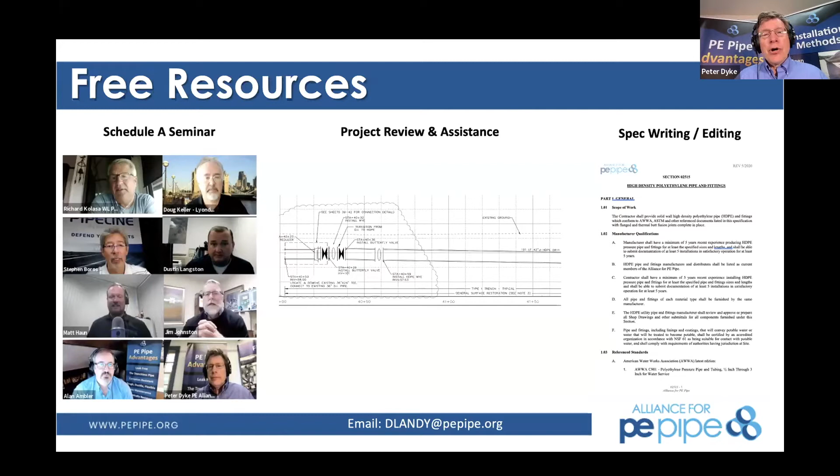So we are revising and adding material to the engineers package that was released in May of 2020. We have learned a lot from you about what you want to see in the engineers package and how it assists you. You've shared specifications with us, project details and plans, and that library continues to grow and grow. So for this one, we've added a specification on slip lining, compressive fit slip lining, and some other additional typical details. We're also really pushing up quite a bit on testing — getting our hands dirty and deep into testing. And of course, in normal fashion, we'll make it very light and in layman's terms too, if you're not interested in going that heavy and deep. We anticipate rolling it out at the end of this year, Pete, if we have any luck. Thank you very much for asking.

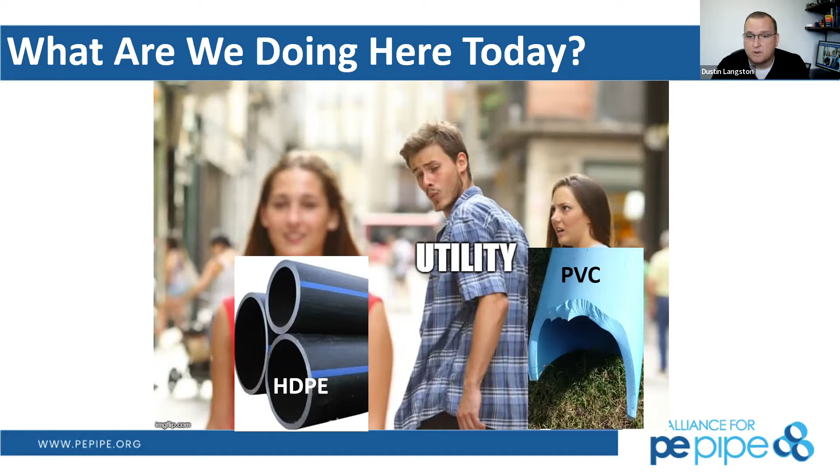Peter talked about this a little bit, the natural evolution of metallic and even before metallic, wood stave and clay pipes, to the plastic generation, PVC and polyethylene. For their time, cast iron pipes were fantastic. Even wood stave, there's a lot of people who don't know this, there's still a lot of wood stave pipe in the ground today.

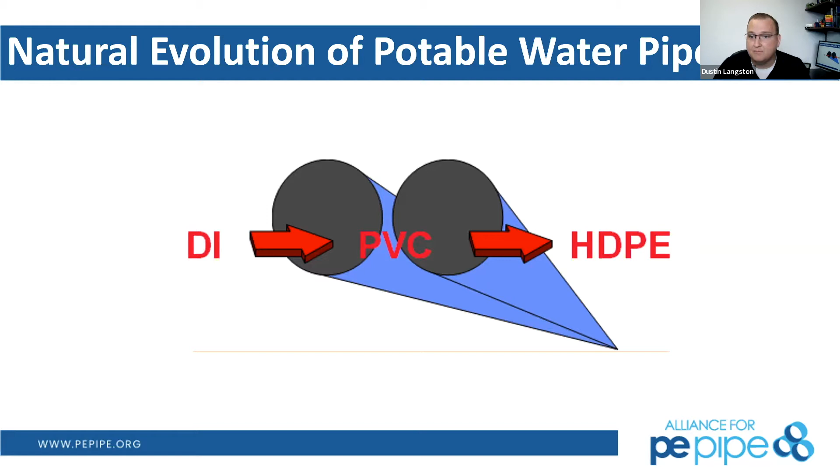Cast iron is the exact same thing, and that's what the ductile iron industry talks about with their 100-year centennial club, they're talking about cast iron pipes that have been in the ground for a very long time, and they're very thick walled. But like Peter talked about, there were some problems, and ductile iron fixed some of those, as did PVC fix some problems that ductile iron had. And at polyethylene, we feel we have the solution for today.

A little bit more of that history: we go to trade shows all over the country, give presentations all over the country, and it always makes me sad to hear people say 'oh, you're that new pipe I've been hearing about.' I'm just like, stab in the heart. Not new, we've been around for a long, long time. PVC was commercialized in 1965 with an AWWA standard. Polyethylene HDPE pipe was commercialized in 1967, just two years later.

And ductile iron, formal ductile iron, had their first AWWA standard in 1963. So we've all had an AWWA standard about the same amount of time. Where polyethylene pipe was a fusible product when it was first commercialized, we decided to chase after other welded products, which is steel pipe. So we started going after anything steel was used in: natural gas, oil and gas gathering, really mostly the energy markets.

PVC pipe came out about the same time. It solved a lot of the issues of metallic pipes and water systems, and they were a bell and spigot jointed pipe, so they chased the water market. In those times, we've become almost the predominant player in both of those markets. PVC by far makes up the majority of water and sewer pipes going in the ground today, as polyethylene makes up the great majority of lower pressure, lower than 300, 400 PSI, where steel used to be.

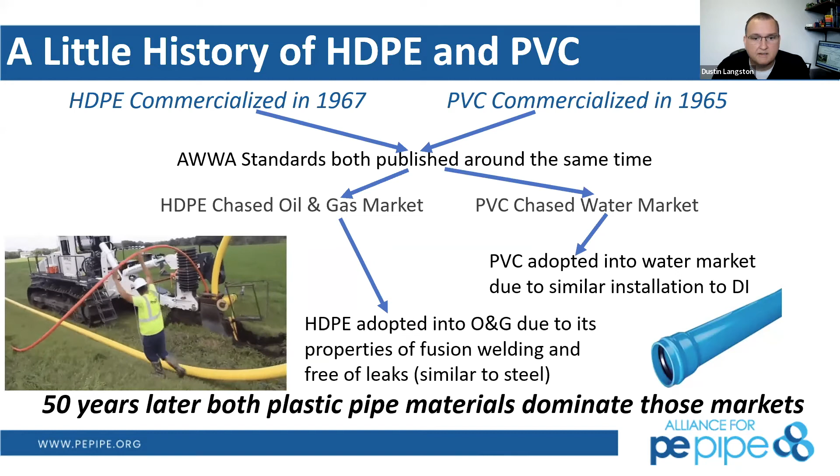In oil and gas gathering and in gas distribution, over the last 50 years, both polyethylene pipe and PVC have been very busy, and we've become the predominant players in those markets. HDPE pipe in the last really 10, 15 years has decided we really do have a fix for a lot of issues that the water and sewer industry markets see, and we need to be offering our product in those markets. So that's why you've considered us the new kid on the block up until now.

So a little bit more on the history. Peter touched on this a little bit. Cast iron pipes, again, very good, a very thick walled product, but they were susceptible to overloading, causing circumferential cracks, fracturing. And these were catastrophic. They would be big breaks. And that was just usually from overloading. If you overloaded that pipe type, put a building on it, under a road, things like that, overloaded, that would fail with a circular fracture.

Ductile iron came out and said, nope, we can fix this. We're going to come in, we're going to change the chemistry of this metal, and we're going to get away from these circular fractures. And it absolutely worked. They got rid of that completely. But our new susceptible failure type now is corrosion.

Asbestos cement pipe, during World War II, we really didn't have a lot of metals to use, so we had to get creative. Asbestos cement pipe came out, and it's now at the end of its life, and it's failing in that same style, which is mostly circular fractures and then joint failures now.

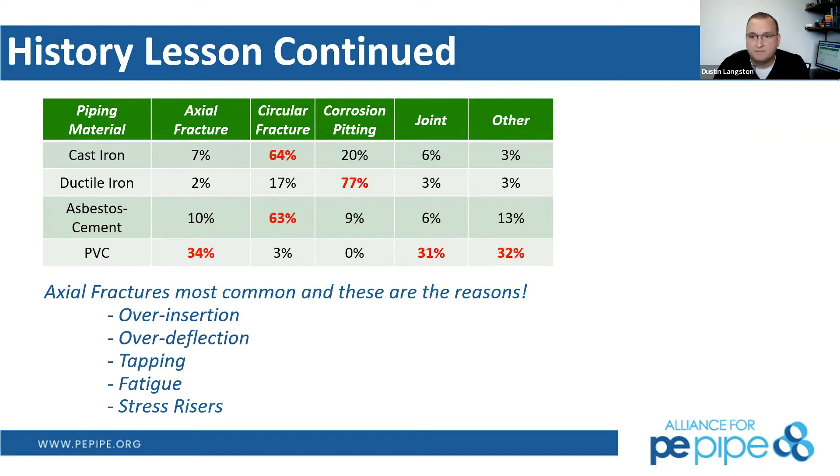PVC, this is a completely different type of failure that we're starting to see with PVC pipe that's never really been seen in the water market before. We'll talk a little bit more about this at the end of the presentation. We don't really have the circular fractures. Obviously, there's no corrosion. Same with polyethylene, no corrosion. But axial fractures have become the new failure type that we really need to talk about, and a lot of these failures are from poor installation. Flat out, PVC can have a very long service life if it's designed and especially installed correctly.

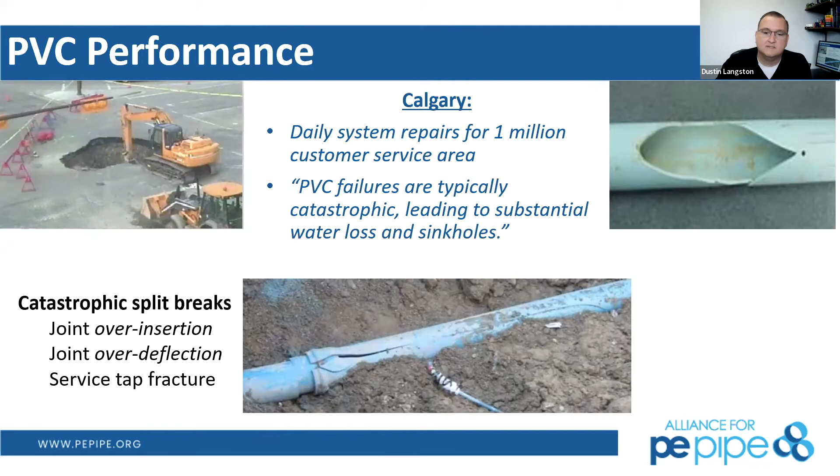The city of Calgary actually did a study here, about 5-6 years ago, on their PVC system and their ductile iron system, to see why it was breaking, what the costs were associated with those breaks, and how long service lives usually were on these products. City of Calgary, for those that don't know, in Alberta, Canada, has over 1 million services in that city. And the findings of their report was ductile iron was by far failing more than anything else.

Pinhole leaks, tuberculation, corrosion, averaging 15.9 breaks, so 16 breaks per 100 miles. PVC was breaking much less frequently, about 1.2 breaks per 100 miles. They also did have polyethylene in this data. We don't like to show it just because they didn't have a lot of polyethylene, but of course the break rate was much less with polyethylene. That kind of skews things because we really didn't have a lot of miles in the city of Calgary. But PVC had much fewer failures than the ductile iron systems.

But in that time, they started to realize that even though we're having 7.5% the break rate of ductile iron, PVC, when it did fail, was failing catastrophically in these axial long running cracks that would destroy whatever infrastructure was above it. So even though it was 7.5% the break rate, it was 764% the break cost. To excavate down to a ductile iron pipe and put a band clamp over a corroded area is very inexpensive and did very little damage above it. When a PVC pipeline came open, unzipped, if you will, it created a big pothole, a lot of damage. It was very expensive.

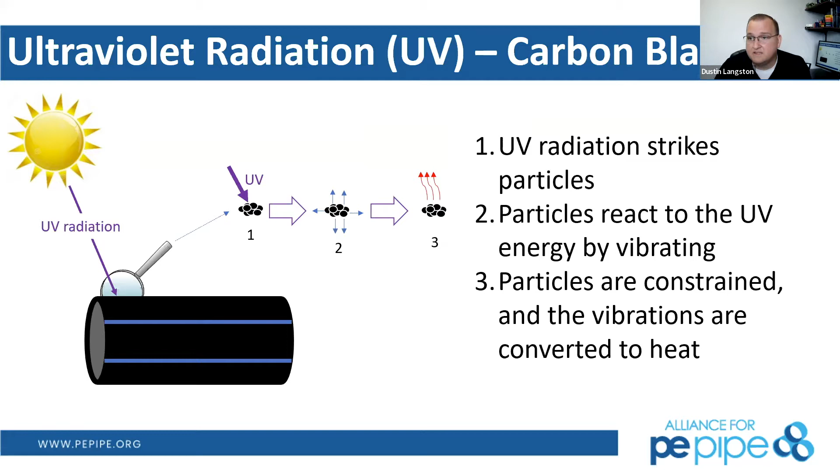So moving on, ultraviolet radiation. A lot of plastics are susceptible to UV degradation. If you ever leave a clear soda bottle out in the sun, you'll see it browns and yellows and starts to degrade. With polyethylene pipe, we use a carbon black additive so that you can actually store it above ground and install it indefinitely above ground. It is completely UV stable for the service life of that pipe.

It's called dehydrochlorination. So Dusty, with polyethylene though, the gray pipe, which is polyethylene, it's just like PVC, you can't leave it out in the sun, right? No, that's a good point.

So you can get polyethylene in different colors, blue and gray, for example. We are still UV stable up to 2 or 3 years. I've asked the PVC guy several times what their recommendation is, and they really don't recommend any outdoor storage - if it's going to be outdoors, please cover the bundles of pipe. So polyethylene, if you get gray for sewer pipe or blue for potable water, these are just options. Most of the time it comes in black with whatever color stripe you want. It's 2 to 3 year UV resistance for those colored polyethylene pipes.

Okay, so that's the gray, but standard black is indefinite outdoors, is that correct? Yeah, we have lots of applications where it's been installed 50 plus years above ground in mines, all kinds of applications. Thank you.

As we spoke more in the last webinar, one of the reasons to do a white interior or gray pipe is it reflects the CCTV camera light better in gravity sewer inspection. So the industry had seen that as a need and subsequently invented Camcore and other products to be able to do so.

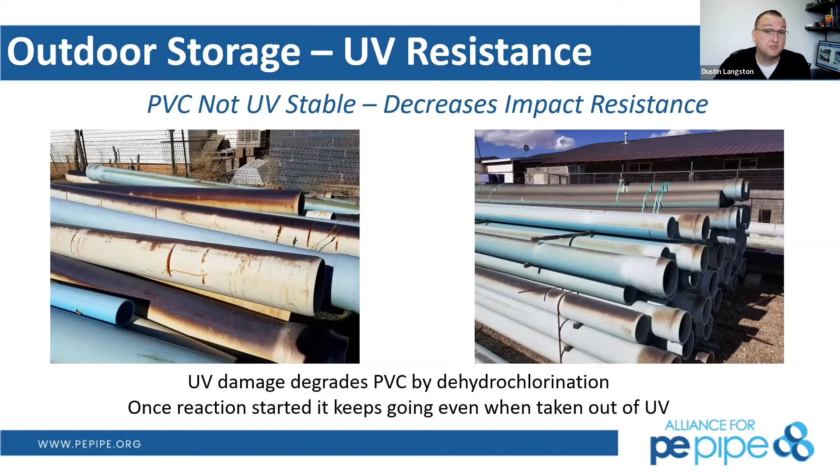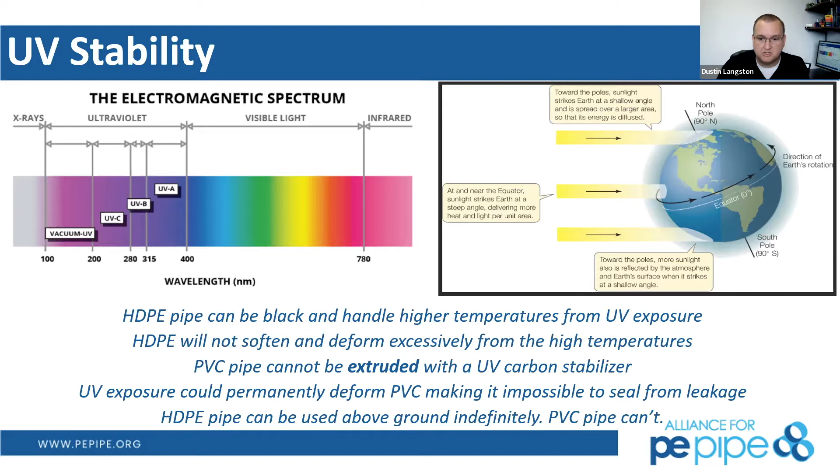Back to dehydrochlorination, this process, once it begins from UV damage, it actually keeps going in PVC, and it can decrease impact strength or impact resistance. So with PVC, well, why doesn't PVC just put black in their pipe like polyethylene does? They might be able to get away with that if they weren't storing it outside. But with PVC, if you were to put black in it, the pipe temperature gets very high. HDPE pipe can handle those higher pipe temperatures from that high UV radiation, but for PVC pipe, it just can't handle the high temperatures that come with being a black pipe.

So bend radius - HDPE pipe is by far the most flexible water pipe type out there. Anybody who's used polyethylene pipe for service tubing knows this. It's absolutely one of the biggest benefits of using polyethylene pipe. One of our claims to fame is you can take an 8-inch DIPS polyethylene pipe, wrap it around a standard 40-foot cul-de-sac with zero fittings. It's flexible enough to do that, and you can still make all your service connections off of that bend arc.

PVC, for example, it's 250 times the diameter, and for polyethylene pipe it's 25 times. All the deflection takes place inside of that bell and spigot joint - it is not allowing you to bend the barrel of the pipe. Same goes for cast and ductile iron.

They have the exact same bend radius because the bend, again, is taking place within that bell and spigot joint.

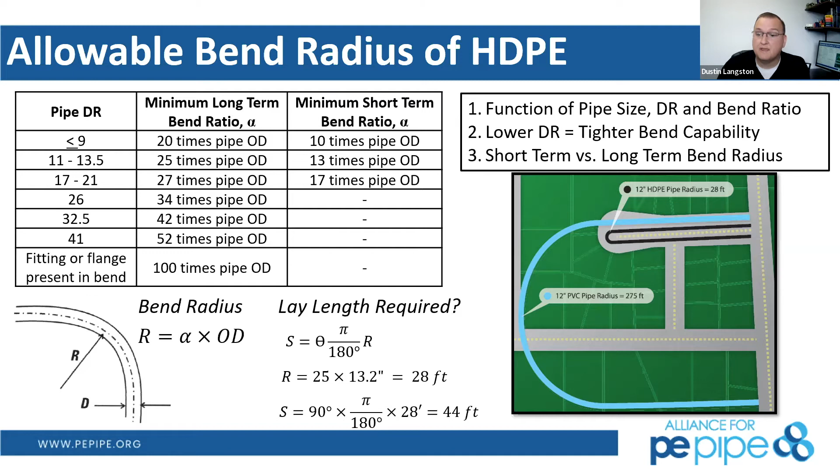Back to that bell and spigot joint, deflection takes place again inside of that bell and spigot joint for PVC and ductile iron. PVC allows 3 degrees of deflection in smaller diameters, only 1 degree of deflection in larger diameter PVC, but failure can occur at as little as 5 degrees. So it's a pretty tight window of what's allowable versus what can cause an actual bell failure in the future.

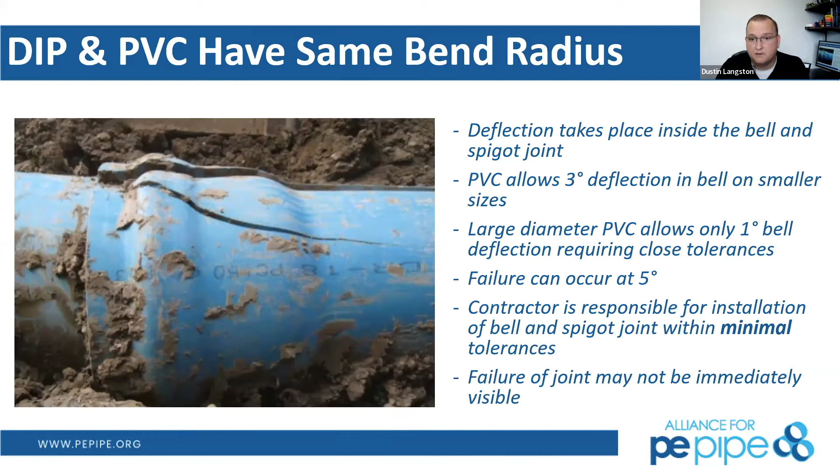Again, these are installation issues, but this is what the city of Calgary was seeing. So during PVC installation, care is of utmost importance. It's especially important to restrain those joints, usually by burying the pipe as you go.

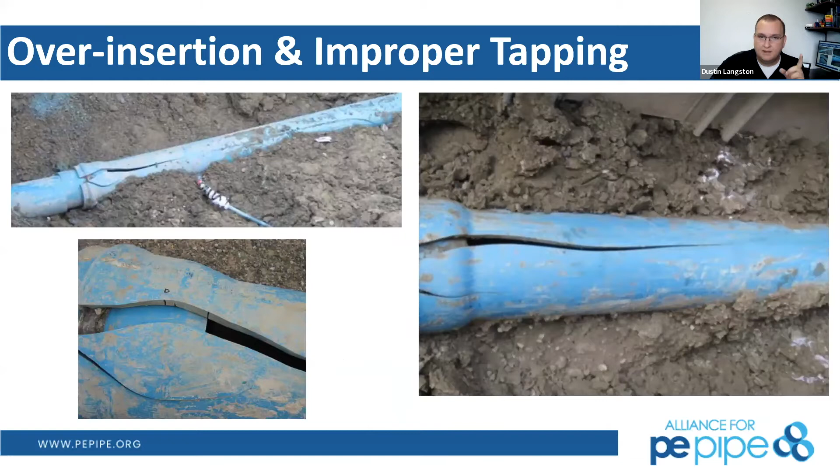If you don't do this, you can actually get a forward over-insertion of where you had already been. You already stabbed it to the correct depth, and now you go down the line to stab the next joint. If it's not restrained ahead of time, you're going to over-insert down the line, and that's what this actually looks like right here. Ford Meter Box has invented a fitting to bolt around the pipe to prevent over-insertion.

But if you're not burying it or restraining it some way as you go, PVC can be susceptible to over-insertion down the line. You're trying to stab that new stick in, and all of a sudden things get hung up, you're at too much of an angle, whatever the case, and it might find an easier way down the line to move that pipe. So it's very important to make sure there's no over-insertion.

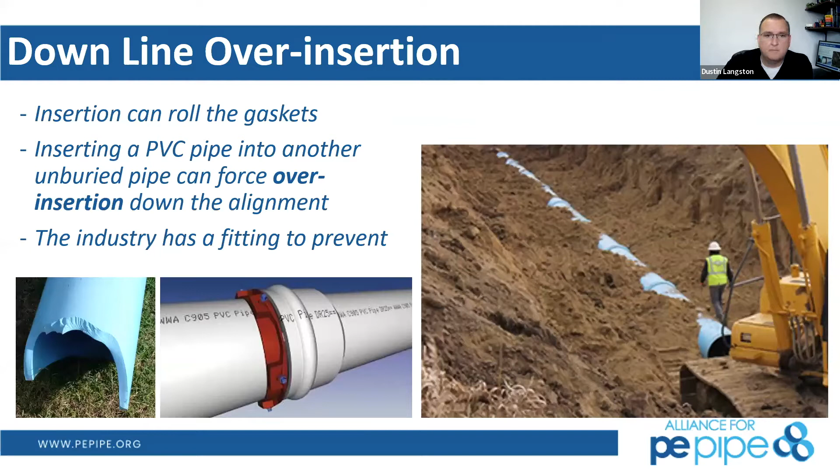Flint actually had some issues like this with a 2-mile, 16-inch line, 14 failures due to over-insertion. Peter, are you coming on to talk a little bit more about Flint for me?

Yeah, it was kind of funny, going back to that previous slide, Dustin, we were there in Flint because they asked us to come teach them about polyethylene. I tried for years to get in there, and they have a ductile iron plant in town, and they wanted to use ductile and bell and spigot systems. Then while we were doing this presentation, over against the wall was this piece of 16-inch cracked PVC, Dusty. And I'm like, wow. So I heard the story, and that's how it got there.

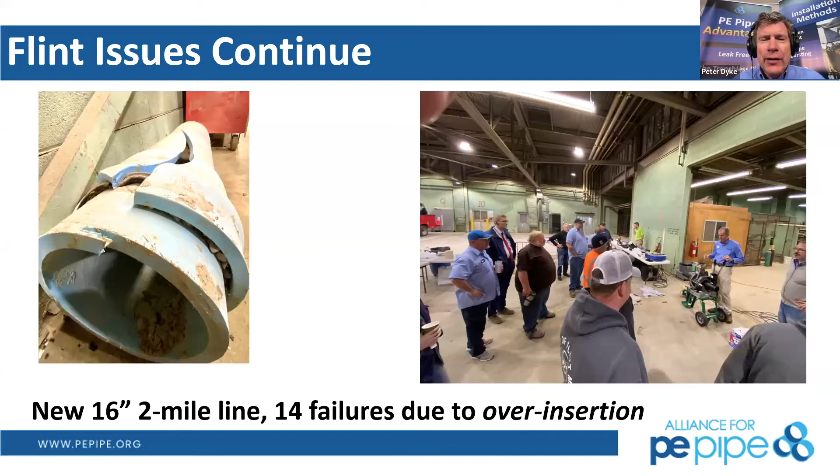But it's easy, everybody knows about the issues that Flint had. I think if you look at Flint and all the issues they're having, they're a microcosm for the balance of the United States.

Whether it's wood coming out of the ground—there's still wood in operation, although not a lot of it, they pulled some of that out in the last couple of years—sinkholes in the downtown. A sinkhole used to be a limestone cavity in rock formations; now it's cars and vehicles falling in from infrastructure failure caused by high pressure water. Cast iron and ductile iron failures, people taking pictures with huge water main failures, Dusty.

What's going on in Flint is going on everywhere. Maybe not all of it at the same time, but when you have a utility that's essentially bankrupt, a lot of bad things happen simultaneously. Flint is on their way out. I'm excited to be part of this process of education and how polyethylene can help solve the problems, but everybody needs to look at this, particularly places like Houston and the big cities that are having huge water loss numbers and large water main breaks on an annual basis.

So Dusty, I turn it back to you. I make it kind of sound like we're picking on Flint—we're not really, because it is a microcosm. No, you're absolutely right. Flint is the perfect example of so many cities and municipalities across the country, especially in the Eastern US.

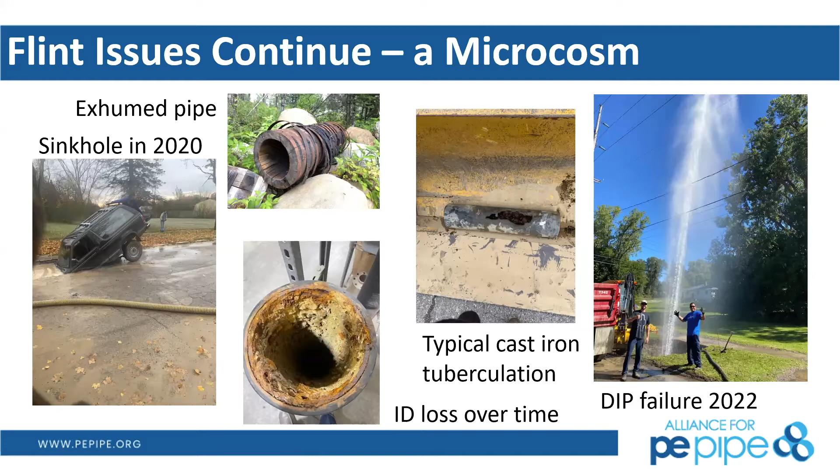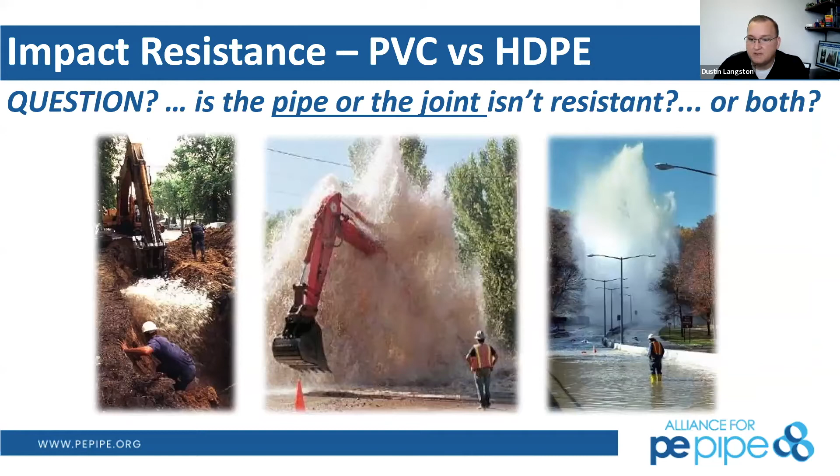Moving on now to impact resistance. Again, this is compounded with UV degradation. Hopefully you're getting your pipe in the ground without it being stored above ground for 6 months or a year, so you don't really have the UV degradation. But PVC versus HDPE pipe, HDPE is incredibly impact resistant. Let's go over that real quick with a little video.

This is a video we put together at McElroy Manufacturing. This is what we call the bucket drop test, where we filled an excavator bucket full of cement. We cut 3 different pipe materials, 4-inch diameter each, 7 inches long, and the bucket weighed 170 pounds.

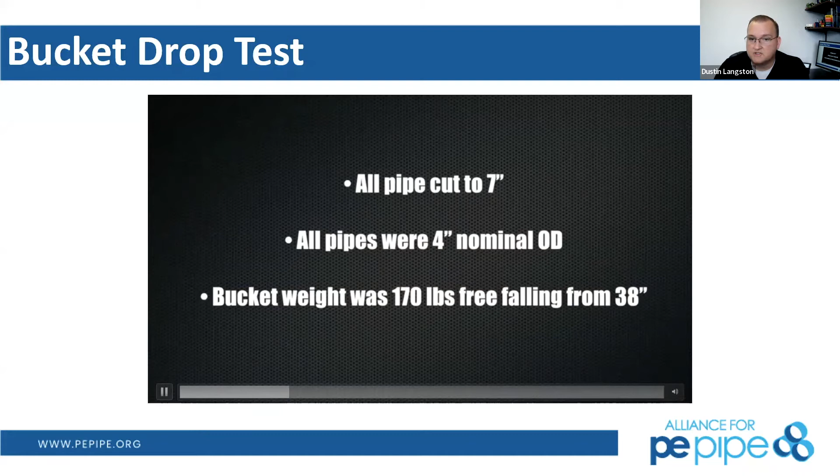First up, we have cast iron. Anybody who's worked with cast iron in sewer is very familiar with how brittle it is.

Here we had DR14 PVC.

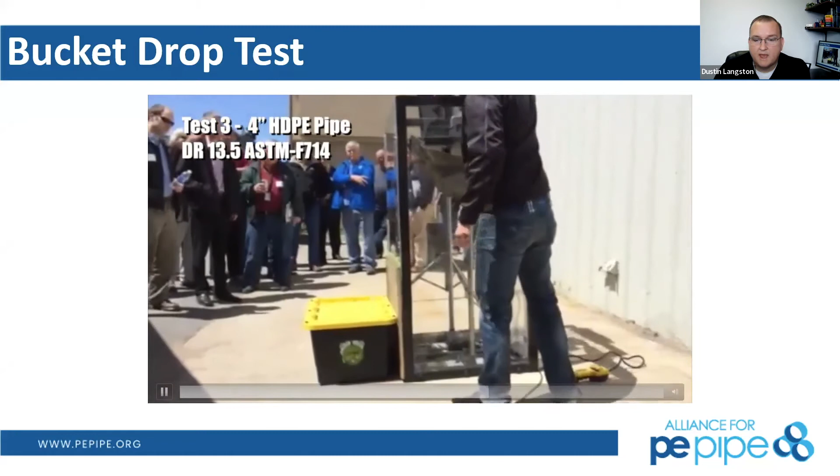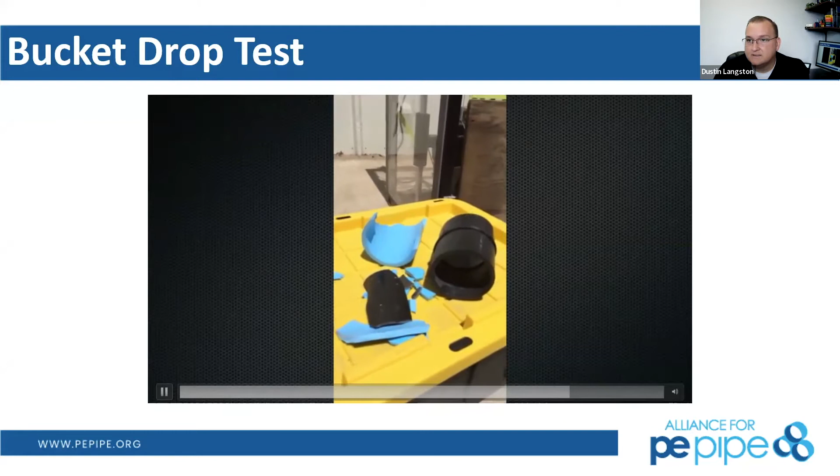And here we have polyethylene, HDPE pipe, with a fusion in the very middle of the pipe. You can see the difference there. The bucket actually struck it twice because it's so flexible, it bounced. Again, that was with a fusion joint in between.

I would love to update this and throw some ductile iron in there. While the ductile iron would not shatter like cast iron, the internal cement liner would absolutely crack and slough off, and you'd have a permanent deformation from that ductile iron hit. So that's a great slide to show the impact resistance of polyethylene pipe. And now it's just going to play this video forever.

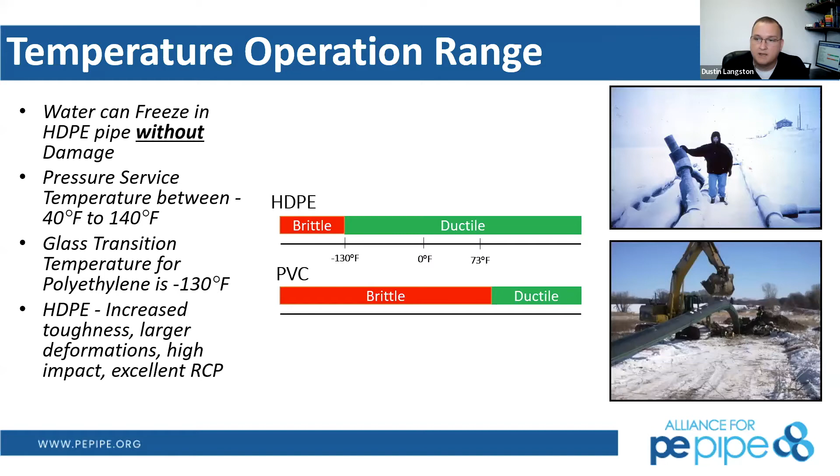One other great benefit of HDPE pipe is temperature extremes. HDPE pipe, even at very cold temperatures down to negative 130 degrees Fahrenheit, still acts as a ductile pipe material. Where PVC, even up to 73 degrees, acts as a brittle material still in its glassy state. Polyethylene pipe can also be used at much higher temperatures than PVC, so it's a better all-around material for temperature extremes outside of the water market. Water and sewer is pretty consistent with temperatures, but for anything high and low, polyethylene pipe is going to be a great fit.

One big thing our competition loves to throw us under the bus for is hydrocarbon permeation. I'll say all pipe types are susceptible to this because gaskets in bell and spigot joints for all pipe materials are susceptible. There's a Water Research Foundation report, probably 7-8 years ago now, where they wanted to see who's being affected by hydrocarbon permeation. The study actually found no instances with polyethylene pipe, but found plenty, especially under houses and personal driveways, of hydrocarbon permeation through gasketed joints.

One of the things we do as competent, responsible environmental engineers, when we can, is if we know there are hydrocarbons within that area, or brownfields as they're called, we don't install pipelines there. We try to route around it, or clean up the hydrocarbons that are there. So that makes logical sense.

But if you're not afforded that opportunity, high density polyethylene offers dual containment, a pipe within a pipe. Those are used in landfill applications all over the place to get leachate, some really nasty stuff, out of landfills. HDPE is not unfamiliar with hydrocarbons, and we know how to handle it.

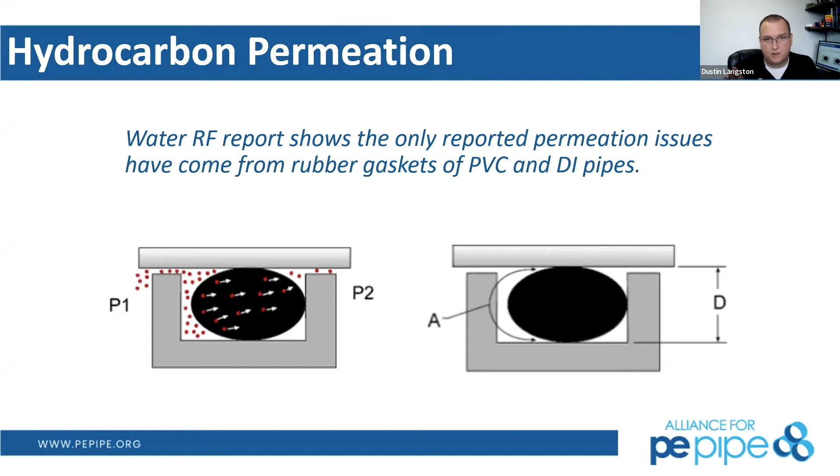On top of that, there's also a polyamide, a nylon wrap, just like ductile iron guys wrap ductile iron pipe to keep water off of it and corrosion away. If you're going through a hydrocarbon contaminated area, you can also wrap polyethylene pipe in a nylon wrap that is resistant to permeation. But again, if you can avoid it, just avoid the brownfields and try to go around.

Gaskets have other issues with chloramines. Chlorine is rather aggressive towards rubber gaskets, but chloramine is by far the worst. We have a lot more cities across the country going to chloramines. Right now we're about 10 to 12, maybe 13% of the market as a disinfectant for chloramine, but it's getting better and more commonly accepted. So chloramines, while great for pipe materials, are very aggressive towards rubbers and gasket materials. In those areas making the changes, there are chloramine resistant gaskets, and they move that direction as well.

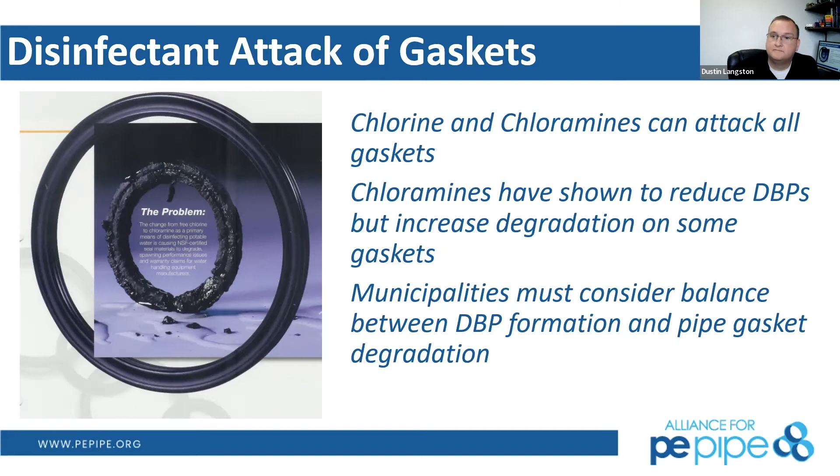One of the balancing acts that water operators and treatment plant operators have to go through is to look at disinfection byproducts that could result from disinfection bonding with organic materials. That's why chloramines came onto the scene. They're actually as old as traditional chlorine themselves or thereabouts, but there's definitely a balancing act of what happens in the pipe as we transmit fluid through it and what happens within your pipe network. You've got to watch it.

Continuing on with the gasket conversation, the EPA did a study back in 2015, so 7 years ago now, to find out how they were getting water contamination in bell and spigot jointed systems. They found that if you have a leak through a gasket, during normal situations you'd be exflowing, putting water out of that leak. But during a water hammer or fatigue cycle, you'd actually be pulling that now contaminated, or potentially contaminated, groundwater into the system through a low pressure spike on the other side of the water hammer event. They have a whole paper on it, here's the link, please copy, paste, and go read this study when you have time. It shows how potentially contaminated groundwater can come back into a bell and spigoted pipe system. So HDPE pipe, being completely thermally fused, is leak-free from point A to point B, so we don't have to worry about any of that potential.

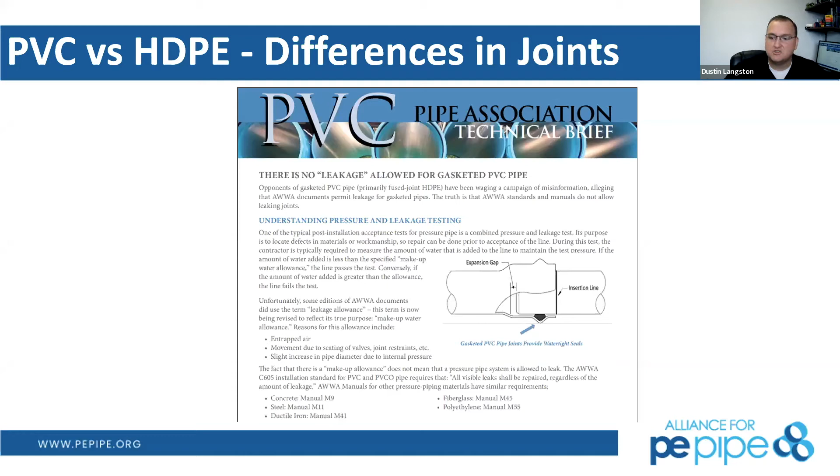What it really came down to is polyethylene pipe has the same thing. The pipe is going to move and figure out its final resting place, it's going to expand a little bit with pressurization. We've taken this into consideration. So when you pressure test a polyethylene pipe, you actually do an initial pressure up where you overpressure the pipe past its test pressure. This makes sure the pipe has fully expanded, moved, and gotten into its final resting place. Then you start your timer for your test, bring it down to your test pressure and start your timer. When you pressure test polyethylene pipe, you are allowed zero, and I mean zero, leakage, zero pressure drop. We're making sure that it's a leak-free system from point A to point B.

PVC guys and ductile iron guys could fix this exact same problem by establishing the same testing criteria, where they do an overpressurization, a time for relaxation so the pipe can become uniform, and then start their timer. But they will not do that, because we truly do believe there is going to be that bell and spigot leakage from day one.

Okay, so you're saying that it does leak during the testing? Yeah, and that the standard permits that? Correct. And even if it's perfectly installed and doesn't leak, that's great, but your standard still allows for a certain amount of gallons lost. So that's what we're trying to get them to change.

I have a question that Matt just responded to, which I really think you need to answer, Dusty. What about contraction and expansion due to temperature differences, which is the major reason not to use PE pipe, especially over long distances? Love it, love it.

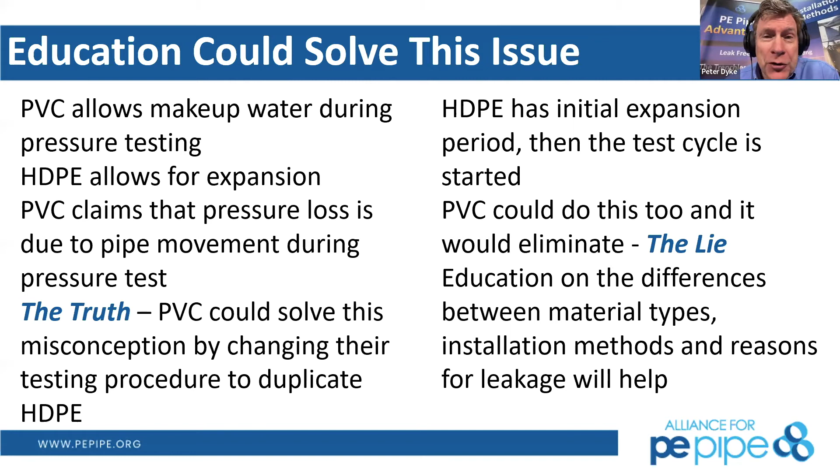So just to go back up a little bit, let's talk a bit more about PVC's history, so we can talk about some of the potential issues that we, as engineers, really need to be designing to get away from and stay away from.

So in 1986, the PVC industry changed AWWA C905. They increased the pressure ratings and lowered safety factors, with no change in materials. It was just, hey, C905 is large sizes, predominantly transmission, and in transmission pipes we don't really see a lot of cyclic fatigue, so we're going to allow higher pressure ratings going forward. It went through and got approved, and overnight a DR18 went from a pressure class of 150 to a pressure class of 235.

Then in 2007, the PVC industry went back to AWWA to change C900, their smaller diameter distribution standard at the time. They said, we've had great success with C905, we haven't seen a lot of failures—but they didn't take into consideration that distribution systems see a lot of cycles and a lot of water hammer events. They said, well, we didn't have failures in C905, so let's make C900 consistent across the board. Again, no change in materials, no cell class improvements, just overnight, with a stroke of a pen, higher pressure classes in C900.

And then the final change in 2018, they took C900 and made that the one standard. There's no longer a C905. It's now distribution and transmission all in one standard. This will probably happen for polyethylene pipe in the future as well, where C901 and C906 become one standard.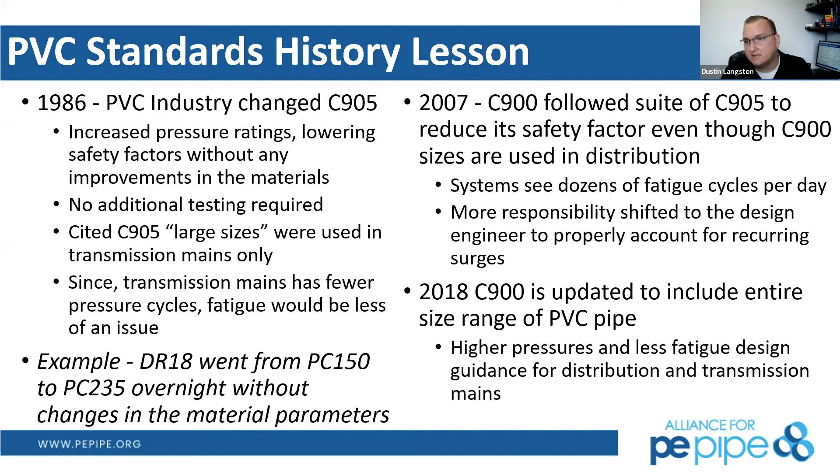HDPE pipe, we really don't see that issue. It's a monolithic pipe system, fully restrained, self-restrained fusion joints. One of the other system failures you find with PVC or ductile iron is if you don't thrust block them correctly, you'll have gasketed fittings push off at the end of the pipe, whether it's a tee or an elbow. HDPE pipe, again, is fully self-restrained. You weld it together and it's not going to come apart. There's no need for thrust blocking unless you're transitioning to another pipe material.

And we have ASTM standards for everything when it comes to HDPE pipe. Again, people think we're the new kid on the block. We're not. We have ASTM standards, AWWA standards for everything. Speaking of M55 at AWWA, the HDPE pipe manual for design is brand new. Make sure to go out there and get a new copy.

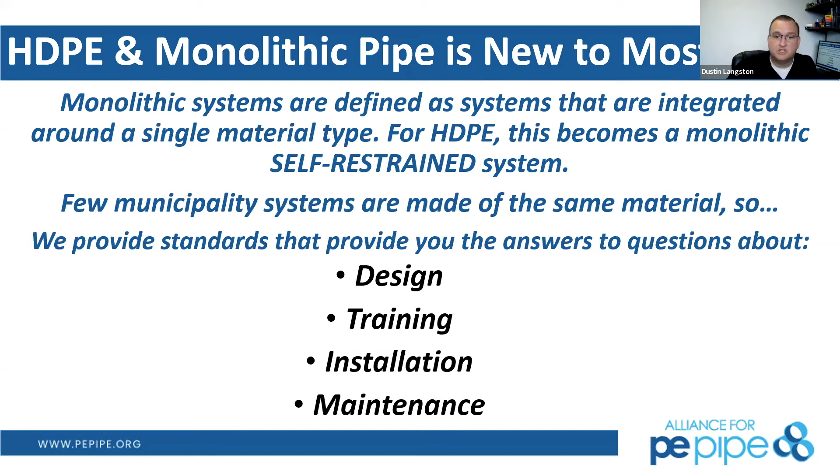Dusty, we've had a lot of great questions here on length growth during pulling for trenchless applications. So if you're pulling that pipe into place through horizontal directional drill, yes, you're going to put it under some tensile force and you may have some elongation. In the good old construction terminology, what we want to do is measure twice and cut once. So the contractor will fuse on a longer length of pipe to make sure that when he pulls it, it's not going to be short. Then they allow it to relax. Then you make that terminal connection itself.

So that's great, and there's two ways we're allowing this to relax. When we do a directional drill or a pipe burst, however long it took to pull into place, we want to make sure to allow it to rest that same amount of time for any strain left over in the pipe from that pull. But on top of that, we need to let that pipe temperature become the same as the ground. In the wintertime this isn't quite as important, but in the summertime, if we're doing a directional drill or pipe burst in July, and this pipe string has been sitting above ground, it could be 140 degrees where your ground temperature is 60 degrees.

So Alan hit it right on the head. When we do that pull, we're going to bring it through and keep a little bit long on both sides. Surprisingly, that relaxation period is typically in the 2-hour range, but we allow, as conservative belt-and-suspenders engineers, a 24-hour time period thereabouts.

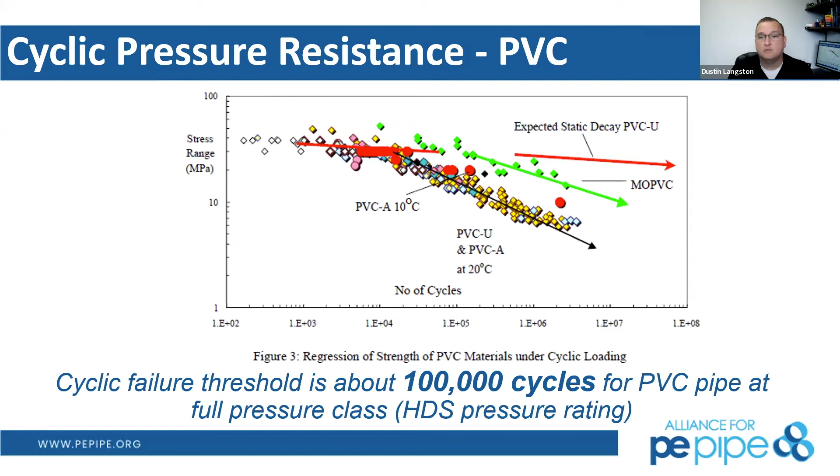So going back to cyclic fatigue. For PVC pipe, ultimately, when the pipe was installed perfectly, no over-insertion, no over-deflection, put in by the best contractor in the world, designed perfectly, the ultimate failure method of this pipe is going to be fatigue. It's going to be a cyclic fatigue failure. For PVC pipe, you can handle about 100,000 cycles. For HDPE pipe, we have testing now that shows we can have over 10 million cycles. Cyclic fatigue is not a design criteria for polyethylene pipe. It's just not a means of failure for us.

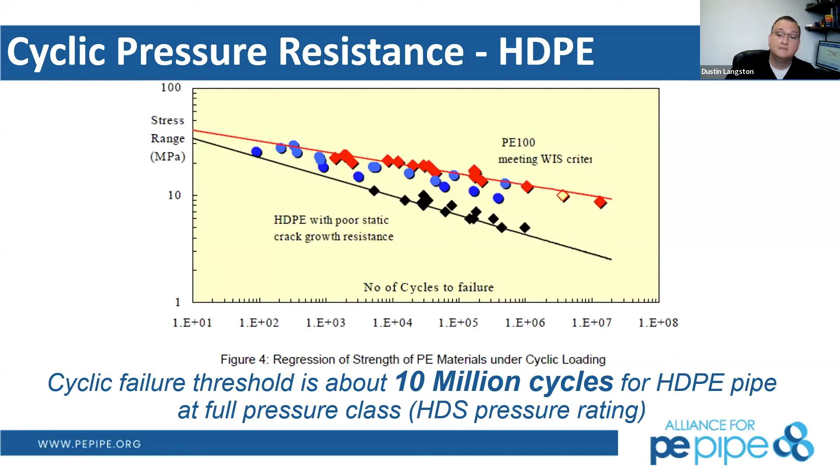We actually had University of Texas Arlington do a study on polyethylene pipe, DR17 rated at 125 PSI, took it to 2 times pressure class, so 250 PSI, over 10 million cycles. My favorite part that wasn't in that report is that Harvey Svetlik, who Peter mentioned before, provided the pipe for this testing. He took some of that pipe sample off test and tested it for new pipe criteria, tensile strength, elongation, all those things, and it still tested as a brand new pipe. So cyclic fatigue for polyethylene pipe is not an issue.

The American Waterworks Association did a study trying to find out the average amount of cycles per day that a typical water distribution system sees. If you take that 100,000 lifetime cycles allowed for 50 years, that's 5.5 pressure cycles per day allowed over a 50-year life. The amount of cycles in a typical distribution system are actually much greater than 5.5 per day.

Oh, right, that was the burst. I was like, what is that noise? So we put that video in for you, Dusty.

While it's not the constant pressure surge that they test at the facility for the resin, they have lots and lots of these pipe samples in different controlled temperature areas, constantly running that occasional and recurring surge through it to prove the hydrostatic design basis that makes up the pressure rating of this pipe. This test is a quick burst test to show basically at the extrusion facility what it could look like as it fails. So this pipe, if it's a DR11, from what I've seen, could be failing at 1600 plus PSI through that quick burst test.

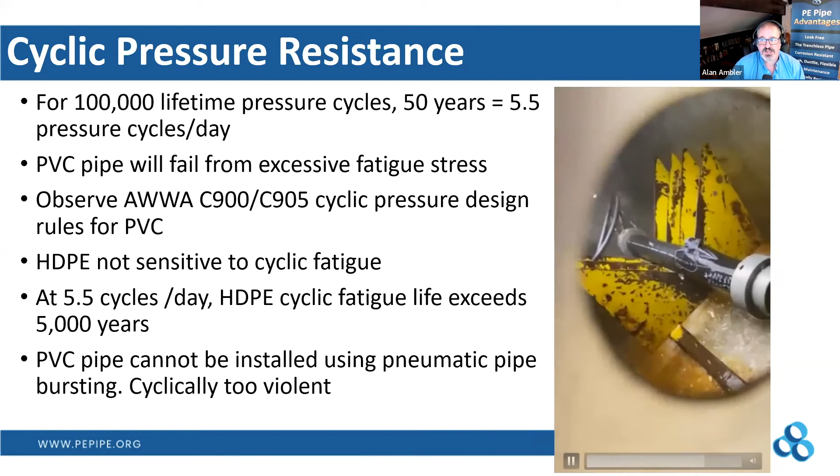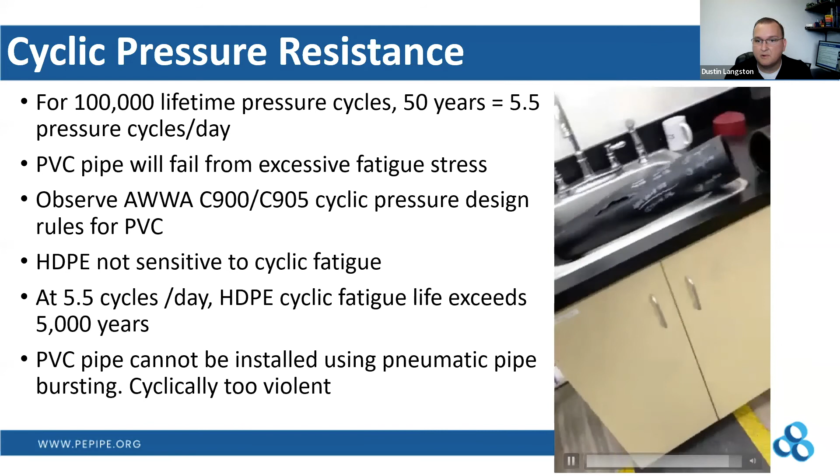Unfortunately we didn't have footage of the controlled chambers, but maybe Dusty can elaborate on the testing that backs up this cyclic pressure resistance claim that we've solved for fatigue. HDPE pipe, with its low elastic modulus, the entire piping system acts like a giant shock absorber. Where you have 5 feet per second flow velocity through a pipeline in polyethylene and that flow stops, you're only going to see maybe 40-50 PSI of a pressure spike. In PVC you'd see a couple hundred, and in ductile iron, 300 to 400 - a very violent, large pressure change.

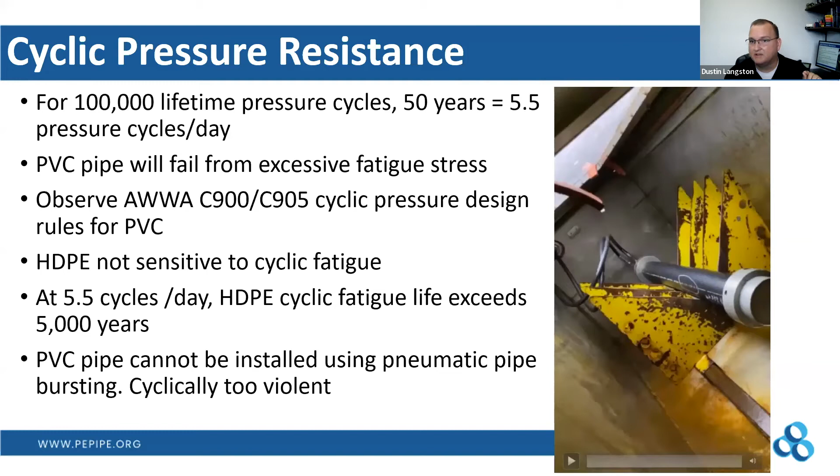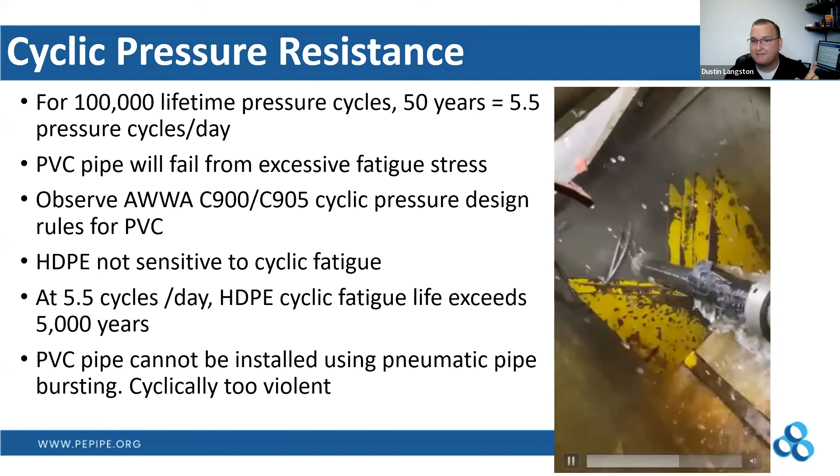But HDPE pipe, if you look at how it fails, it actually stretches to the point where it thins the wall and finally allows it to fail. Look at the expansion before the failure. The other thing I like to point out is that the failure is localized - we maybe lose a foot of pipe that has to be replaced, and you move on.

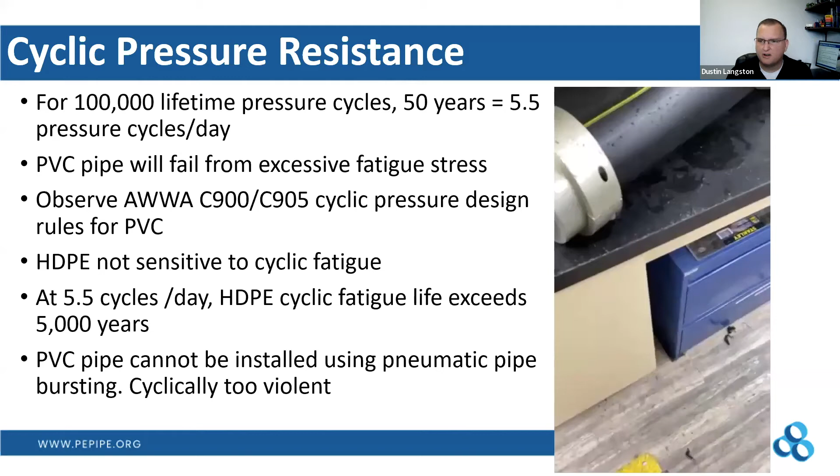The other thing I'll mention is you rarely see that scenario in the field. Alan hit it right on the head - we're talking 4 to 5 times the pressure rating of the pipe to actually blow it up. The only time you run into that is if somebody's doing a pressure test and their gauge is broken or not calibrated, and they just keep putting more pressure until it finally yields the pipe. So it's very, very rare that you'll ever see that type of failure in the field.

PVC's favorite argument is that if you use polyethylene pipe against PVC, you need two things: the same inside diameter and the same pressure class. So if they say, hey, we've got a DR18 here rated at 235 PSI static pressure rating, you have to use a DR9 polyethylene with 250 PSI pressure rating, which forces us to go up another diameter to match the PVC's inside diameter. This is absolutely not the case.

The first question out of my mouth is, what's your service pressure or working pressure of that application? Usually it comes back 80 PSI, 100 PSI, something like that. In that case, you need to be going DR for DR with PVC pipe, because that 235 PSI, while it is a pressure rating, it's not a flow velocity pressure rating - it's a static pressure rating. So the math really comes down to this: anytime you're running at 5.6 feet per second or more flow velocity, you should be quoting DR for DR, polyethylene versus PVC.

So if you have an 8-inch DIPS DR18 PVC, you should be quoting against a DR17 polyethylene system.

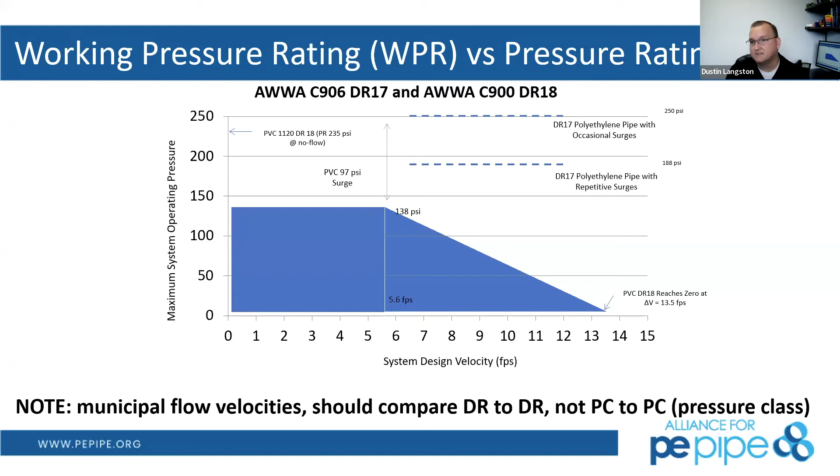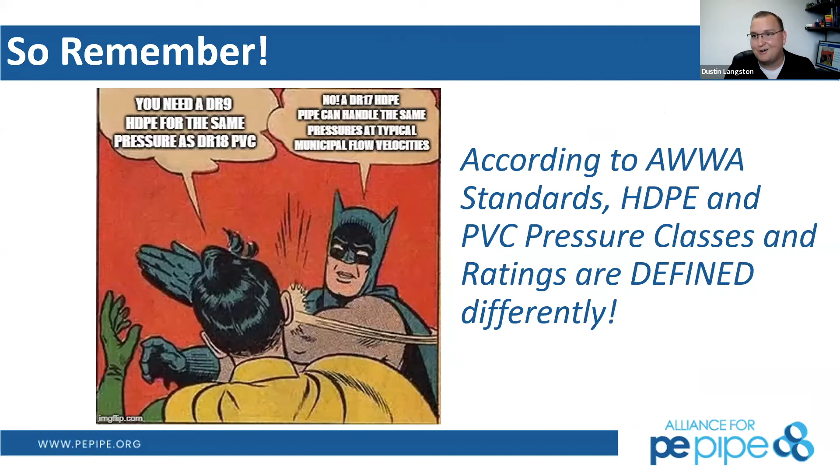And I love putting memes in these things. They feel rather dated, I really need to stay on top of these things. This was a funny meme 2 or 3 years ago, but now I've got to come up with something new because memes move fast and I've got to stay on top of these things.

There's also a great calculator out there for anybody who wants to use it. This is free to use, it's called PPI Pace at ppipace.com. This allows you to do exact side-by-side comparisons of ductile iron, PVC, and polyethylene to see how they'll react in your systems. So here we have a 10-inch DIPS, ductile iron rated at 350 PSI, DR17 poly, and DR18 PVC.

Side-by-side comparison, working pressure 70 PSI, temperature 57 degrees, and then we're looking for a 100-year minimum design life. It'll actually come through here and give you, hey, what does this look like? I also want to mention design velocity here is 4 feet per second, and occasional velocity, so fire situations, is 8 feet per second.

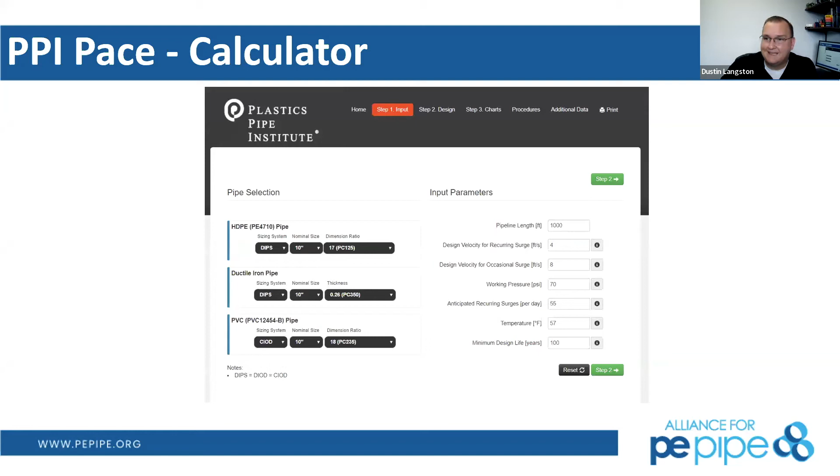So still pretty conservative. And here we can see PVC failed and ductile iron failed. The reason ductile iron failed is because a flow velocity of 8 feet per second in ductile iron, because of its high elastic modulus, is going to create an extreme pressure cycle. So you actually get 100 PSI above pressure class for ductile iron for a surge, and this far exceeds it. I think we're sitting at 590 PSI total on ductile iron.

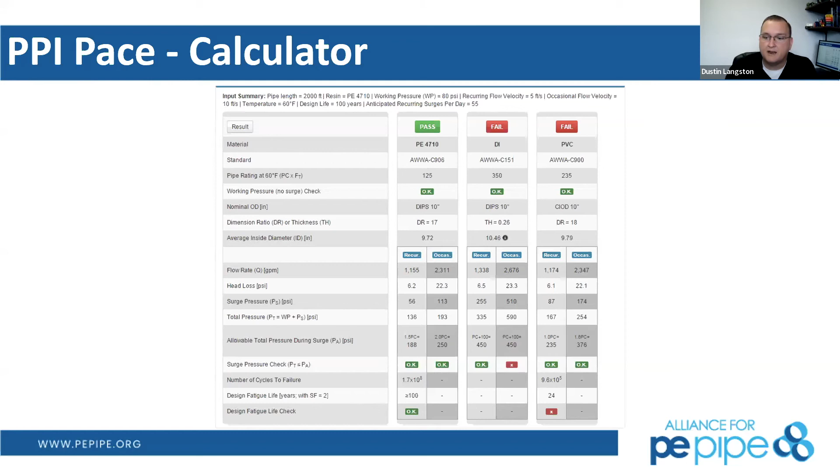PVC was totally fine as far as the surge pressures, but the amount of surges, your design life is going to be about 24 years before you hit that 100,000 cycle life.

This is actually recent, I literally do these all day. People call me every day. Hey, I've got this PVC job, we want to use polyethylene, customer wants to use polyethylene, what size should we use? And so I'll go in, we'll run the math.

They came through and said, hey, we want to upsize. I'm like, you probably don't need to upsize, because they wanted to put in a very, very thick DR11 for this application. So we did a side-by-side comparison again. DR17 is rated at 125 PSI, and that is at 5 feet per second. They had a very, very high flow rate on this, and I think they were using a DR25 PVC. Come to find out, we can go with a very thin DR21 polyethylene and keep those same inside diameters pretty close, and they were able to use polyethylene without having to do that upsize.

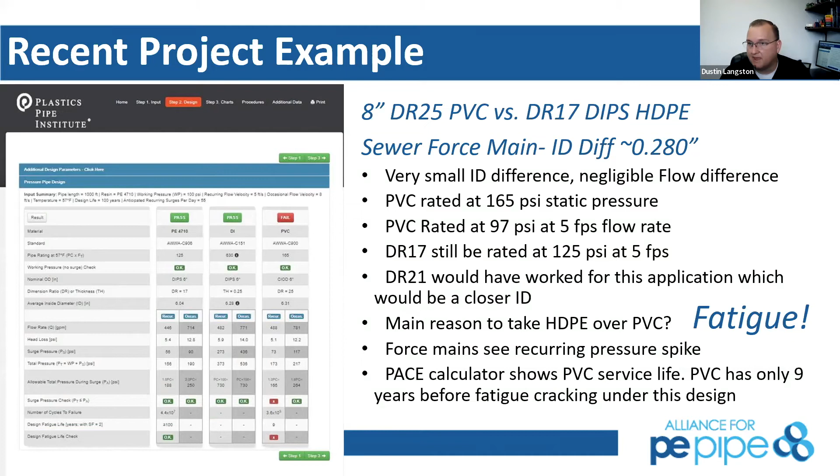So continuing on that pipe comparison, PVC pipe again has a higher tensile strength than polyethylene pipe, but it's not really needed. You really don't need these high tensile strengths for most of the applications. Really, it's designed beyond the point of need.

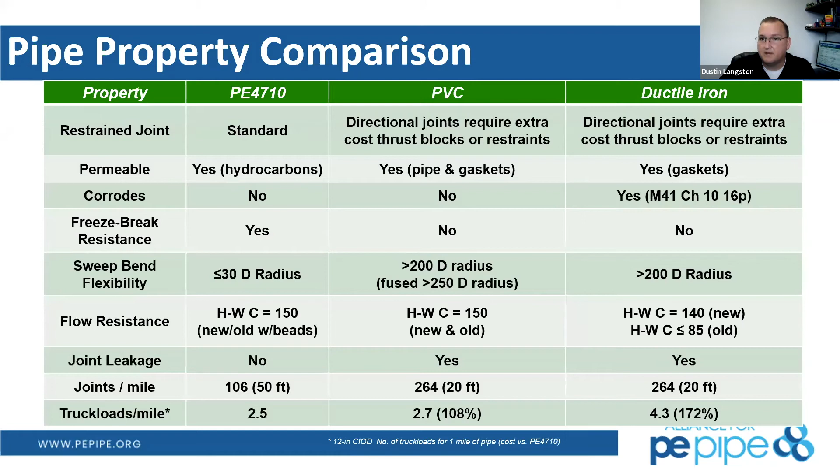I don't know who else on here enjoys watching TikToks. I love it, but not for the normal reason most people probably love it, watching dances or whatever people watch. I love to watch it because every contractor has some 20-year-old kid or 25-year-old guy working on their crew, and they video everything, almost all day long, and they just put this stuff up for free. So me as a pipe manufacturer, I love to go out there and ask my customers, hey, can you get us some pictures or videos? And I never get anything, nobody ever responds to me. Then I just go on TikTok and type in HDPE pipe or directional drill or whatever, and there's some 25-year-old guy on the job site that's videoed their day and put it up for free.

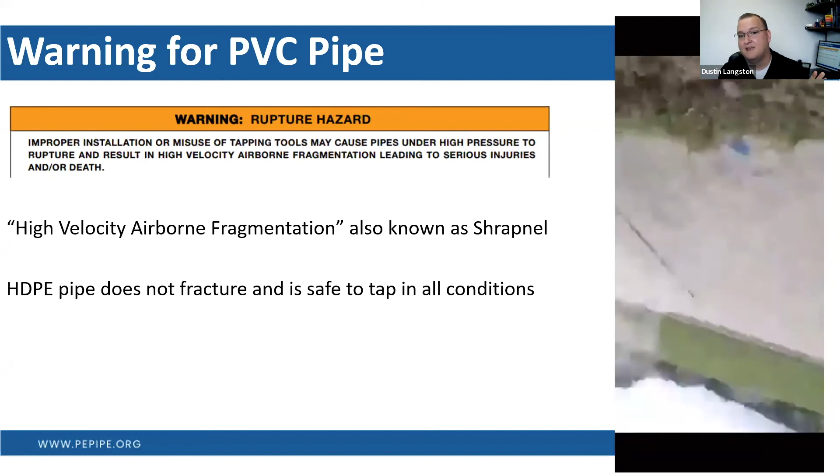Again, he did everything wrong. But again, with polyethylene pipe, HDPE pipe doesn't fracture. During taps, during bending, whatever the case, you're not going to have blowouts like this.

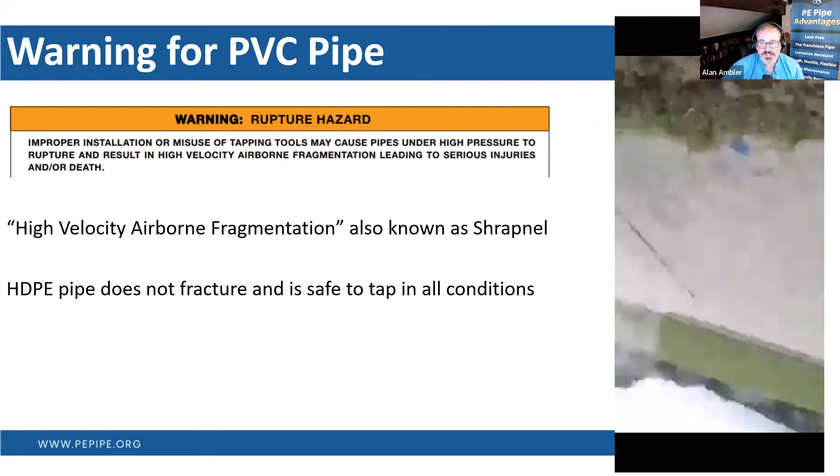It could easily be observed that the trench wasn't exactly a safe condition, as well as it was above his shoulder, which is that OSHA established height. But we do learn more from failure than we do from success. So in this instance, we are going to learn from Dante's failure and never forget some of that as we go through. That's Dusty, right. Definitely, thank you for sharing.

Thanks. Again, now we're getting into fusion. So what's the real benefit here of polyethylene pipe? Sure, it's very flexible, it's very ductile. It moves with ground movement, whether that's freeze thaw, seismic events, drought events. You're going to move with the ground. But what it really comes down to, the biggest benefit of using polyethylene pipe is fusion.

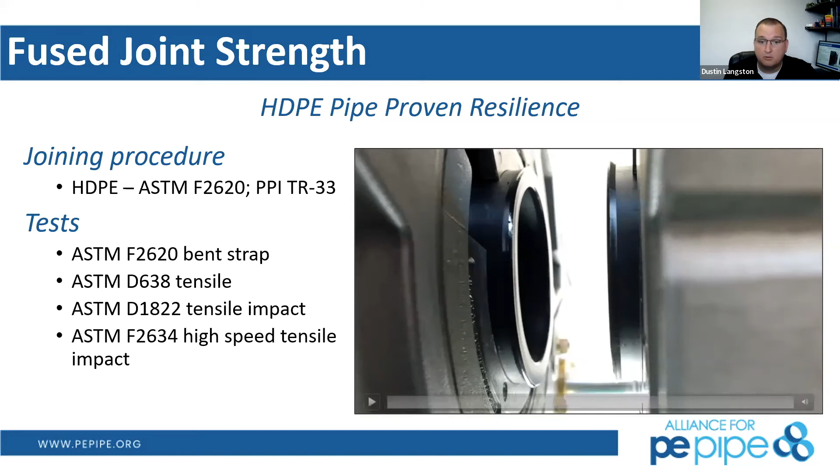If you don't believe in fusion, if you don't believe in the fusion strength of being as strong as the pipe itself, you're not really seeing what polyethylene is for its full system. You're not taking advantage of everything.

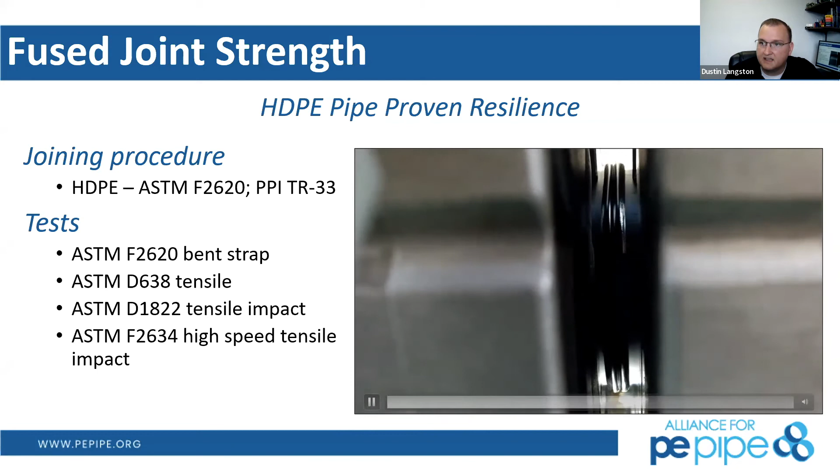I literally just got off the phone this last week with a customer doing a 30-inch DIPS project using ductile iron fittings to connect every 50 feet of polyethylene, and he's having failures. And I'm sitting here like, why did you not rent a fusion machine and butt weld this? He's like, I like to bolt stuff together, we just prefer bolts. And that just completely floored me.

So now they are fusing. They tried one fitting and it didn't work so good. And again, these were non-polyethylene pipe fittings. They were only for ductile iron pipe, and they didn't work on polyethylene. He just couldn't believe it. And so now they're redoing all that with fusion.

We have all the testing and all the fusion standards. F2620 is the fusion standard. It also includes a test method in there, called reverse bend or bent strap, which you can do on pipe walls of 1 inch and thinner. You have D638, which is in-lab tensile testing, tensile impact, high-speed tensile impact. You have a lot of standards out there to test the fusion strength of polyethylene. And again, their claim to fame is the fusion joint is as strong as the pipe itself.

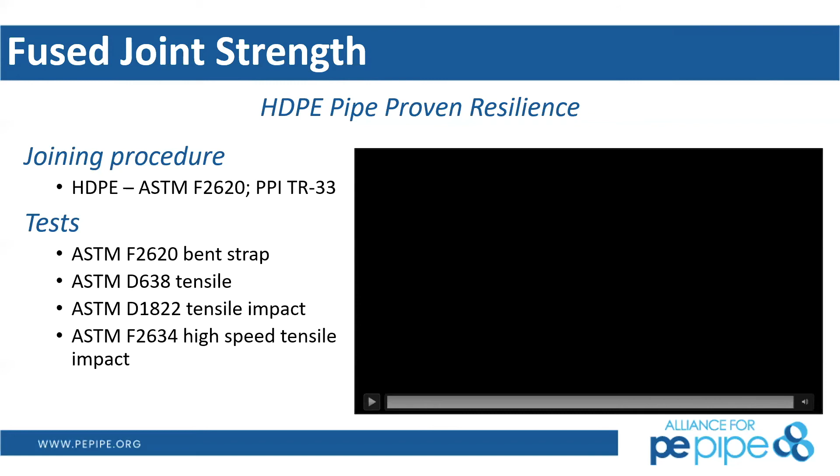Stephen, you had a question? Yeah Dustin, we had a question in the Q&A section talking about the differences between HDPE and what they called fused PVC. That has a broad range of answers, but while you're showing this information, I think it's very important to note that a heat fusion weld by polyethylene and one by PVC results in a very different joint. They may look the same, they may use similar equipment, but molecularly the polymers don't join the same way.

That's why a joint of polyethylene, fused the right way, gives you a joint as strong as the pipe. In a PVC butt fusion failure, it's not as strong as the pipe, and there's very specific reasons for that. So everybody needs to be careful with that, make sure you look into it and do your due diligence to make sure you're getting what you think you're getting. Yep, that is exactly correct.

And I'm sitting here trying to find on my desk my fused PVC sample. I have hundreds of these things to kind of demonstrate the difference in the way it looks. But Stephen hit it right on the head. With a fusion for polyethylene, you have a full molecular entanglement going on, that is providing not only the tensile strength the same as the pipe, but also the ductility and bending of the pipe itself. We'll really drive that point home in a few slides when we talk about swage lining and tight fit liners. But again, the tensile strength of a fused PVC is not that of the pipe strength, versus polyethylene, which is.

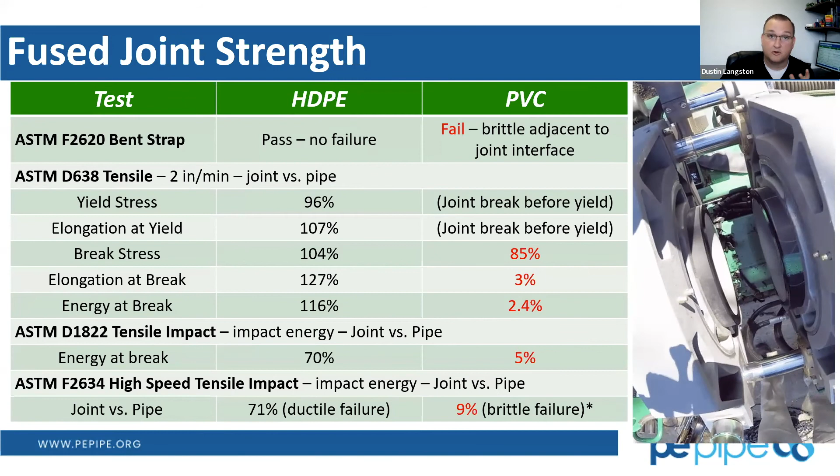RCP, we can talk about RCP. This applies to every pipe material. Every pipe material can have RCP, which is rapid crack propagation. But you have to have exactly the right criteria going on in your system to be susceptible to rapid crack propagation. This is something we understand all the way through with polyethylene pipe because we're used in natural gas distribution systems. You have to have great RCP resistance in compressed gas systems, to make sure you're not going to have some kind of a long running crack if you are struck by a third party backhoe, bucket, whatnot. So this is something we absolutely understand with polyethylene pipe.

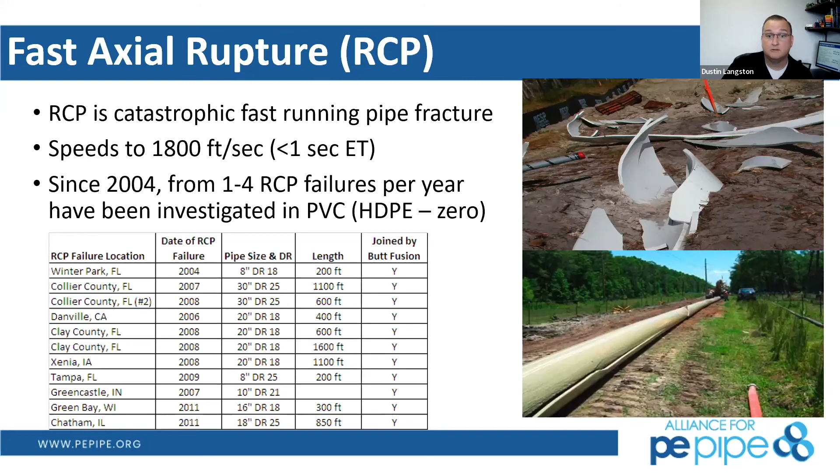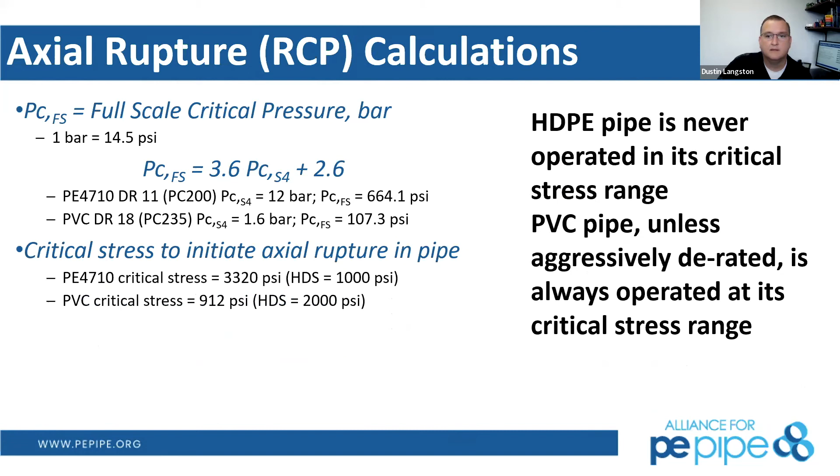So there are different ISO test methods to do this. And what we found is that RCP can occur with just 2% entrained air in PVC. HDPE pipe, it takes a minimum... where do I have it for polyethylene? It's like 15%, I believe. I'm so sorry, you guys, I thought I had this in my previous order.

Oh, dang. Sorry about that.

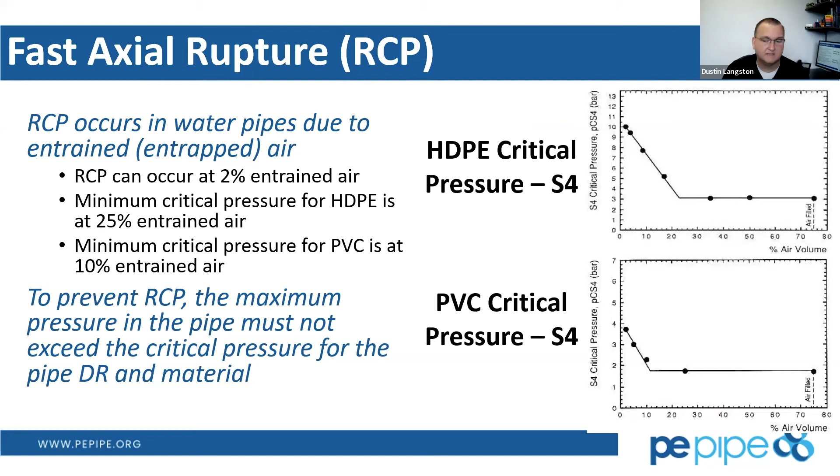So again, it takes much higher entrained air, maybe even 25% entrained air, for RCP to occur in polyethylene pipe. The other side of that is the stress put on the pipe by internal pressure is only 10% of the pressure class for PVC, whereas for polyethylene you'd have to actually be operating outside the pressure class to be susceptible to RCP failure. So RCP isn't really an issue for polyethylene pipe, and the best way to prevent RCP is to use HDPE, since there's no criteria within our prescribed pressure ratings where you'd be susceptible to RCP failures in a water system.

Alan: So Dusty, I love it when you can just see the light go off, and ding ding ding, there it goes. It's great when you share that with us.

We've gotten some comments saying, you know what, if that pipe can be used in the natural gas market where leakage means houses blow up, then it darn well better be used with potable water. And you got it, that's it.

Exactly, and I love that light bulb going off here in the West where I live, because we don't have water right now. That's the number one headline news anytime it's talked about. Any drop of water we can save from point A to point B by getting rid of leakage in a piping system, we're ahead of the game. That's absolutely the best thing we can do.

We've been to plenty of cities across the US with very high water leakage rates, and they don't care. Niagara Falls, for example, has a very high leakage rate. They don't care, they have plenty of water.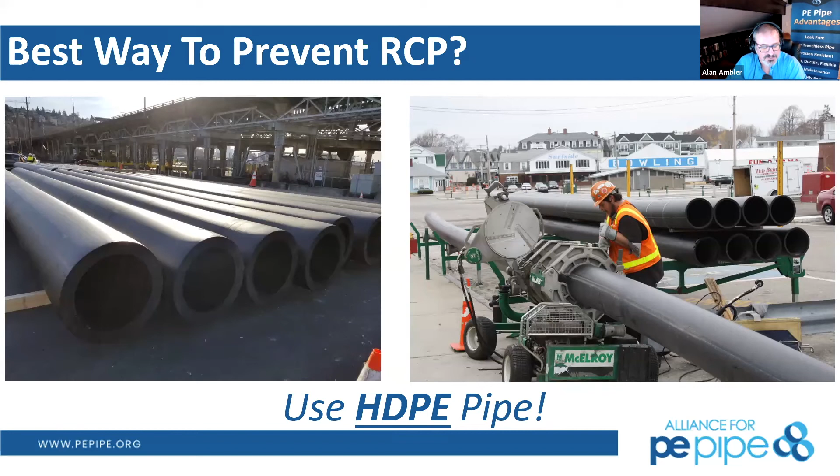On the next slide we've got a great cameo by a well-respected... oh hey, look, it's Dusty, there it is. I'm not sure if the sound's going to work, but if it doesn't, Dusty, please narrate it for us. I think I was taking the video at this moment too, and we were in the lovely city of Napa on a pipe bursting project. Without further ado, let's see the cameo from the man himself.

As I say, there's nothing more cringe than having a video of yourself in your own presentation, so I'm not going to play it, I'll just voice over this. All we're talking about here is productivity. We have one gentleman working the fusion machine behind me, doing 6-inch pipe for a pipe bursting string, 500 feet at a time. He's welding that, taking it out of the machine, moving it down the line, welding another joint, all by himself. This is a one-man show, and it's an extreme way to show how productivity works using polyethylene pipe.

This is then dragged to the insertion pit where the pipe bursting begins.

Just for the record, Dusty didn't put the video in, I did. So there you have it. Thank you for taking that, I think it makes me not look so... he put a video of himself in, but not Dusty.

I would, yeah, exactly. Moving on to the ductility of things. I spoke at a SPE plastics engineering conference a couple years back, and really wanted to highlight the ductility and flexibility of polyethylene compared to other plastic pipe materials. So here's a few slides from that.

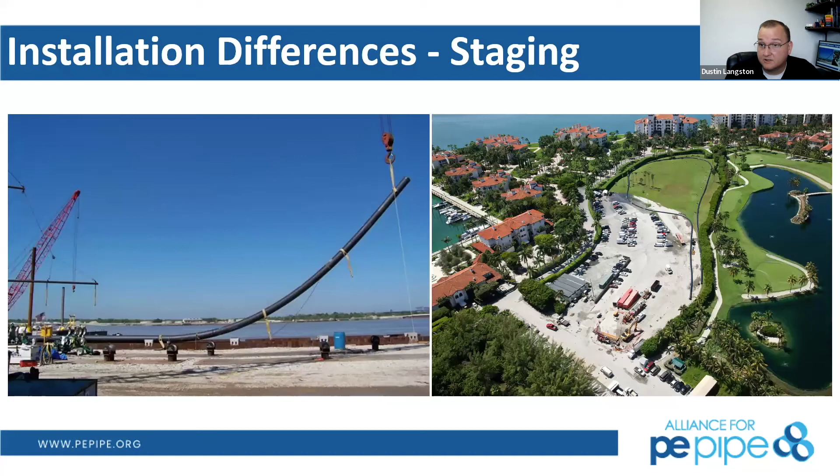The big thing I like to show with this is that polyethylene pipe is so ductile and friendly to use and install that you're not having to use a ton of equipment to keep your bend stresses down. If you have a bend stress on other fusible plastics, you can absolutely snap a fusion in half or break a pipe. With polyethylene pipe, you're using very little equipment to handle this, whereas with other fused products, you're using quite a bit of equipment to make sure you're not putting any undue stresses on the pipe to prevent failures or overstresses.

Pipe bursting, this is absolutely where polyethylene starts to shine, in trenchless applications. We are by far the predominant material when it comes to trenchless installations, and the biggest reason is our flexibility and ductility. The insertion pits and exit pits are the smallest of any pipe material, again due to that flexibility.

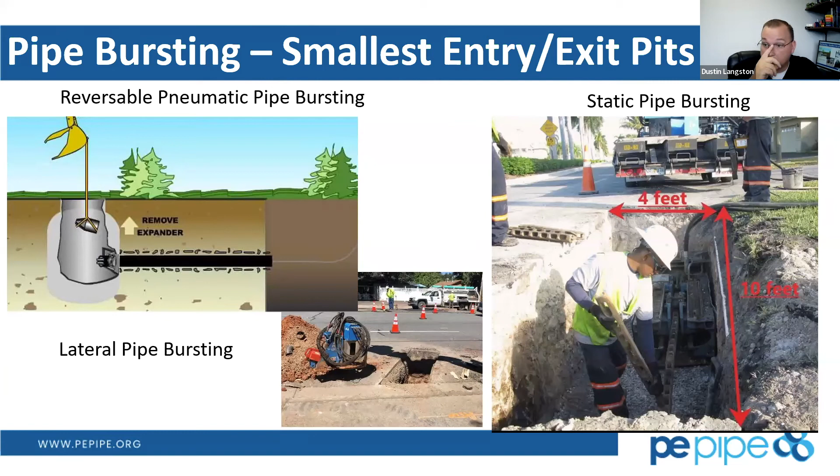There's lots of different options when it comes to trenchless: static pipe bursting, pneumatic pipe bursting. I'll also mention that polyethylene pipe is the only allowed pipe material in pneumatic pipe bursting for sewers, because that is such a violent process, using a pneumatic hammer at the beginning of the line, that no other pipe material can hold up to that cyclic stress from pneumatic pipe bursting. So it's just polyethylene.

One of my favorite case studies, we're going to go through a few here now. I'm glad this is finally out of litigation with the city of Seattle, so we can talk about it. This is King County, Washington, where they attempted, first, a 34-inch fused PVC pipeline.

This was a directional drill. Both polyethylene and fusible PVC were optioned for this job, and both would have absolutely worked. The contractor, for some reason, went with fusible PVC the first time, for a drainage system. It was a very deep directional drill, down a hill, and it would collect water into a tank anytime it rained, so that water could be treated before being released into the Puget Sound. The first rainstorm came after the installation, and those tanks did not fill.

There was no water, so they camera inspected the line and found catastrophic failure — the line was completely full of debris. They went back through and said, well, attempt one didn't work.

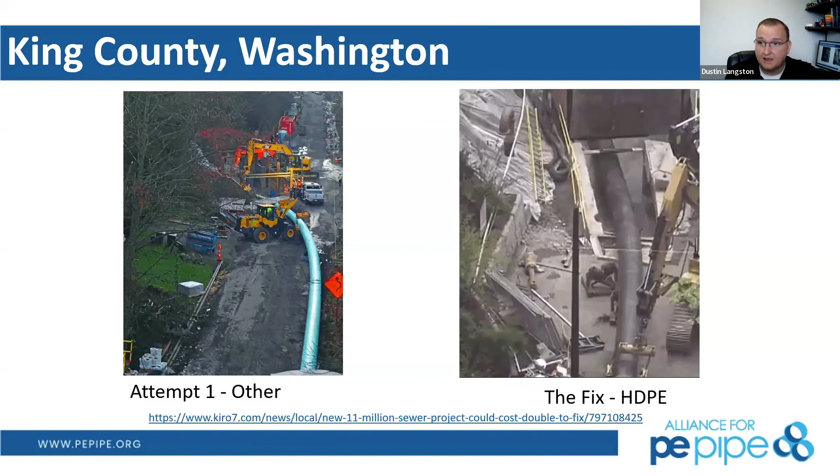Attempt number two: let's actually try to use that pipe and pipe burst it. Let's use polyethylene pipe now, pipe burst the brand new DR14 PVC, and pull polyethylene inside of it. And it worked — they absolutely did it. This was two times the stresses of the original installation, and polyethylene was still able to do it. So again, polyethylene pipe is perfect for trenchless applications.

Here's the compressive fit, what we call swage lining, where we're going to take a slip line, but we want to maximize the inside diameter of that slip line. It's easy to pull in a smaller slip line and grout the annular space, but in this case we don't want to do that — we want every millimeter of that inside diameter for flow. So we're going to take a pipe size of polyethylene that's larger than the inside diameter of the host pipe.

We're going to pass it through either a set of box rollers or a swaging tool, which is just a die — that's what you see here. It reduces the diameter of the pipe down to, let's say, 2 inches smaller than the host pipe. While we do that, we hold tension on the pipe so it doesn't go back to its original diameter. By doing that, we now have a smaller diameter that we can slip down the host pipe. By the time it gets to the other end, we release the tension, and it goes back to its original diameter, or attempts to, becoming a snug, tight-fitting liner against the host pipe.

This is the biggest thing for me to show — the ductility and the strength of a fusion. Sure, it's impressive for a pipe to go through this. Of course it's impressive. But it's even more impressive when you realize that there's a fusion every 40 feet, every 50 feet, on this line.

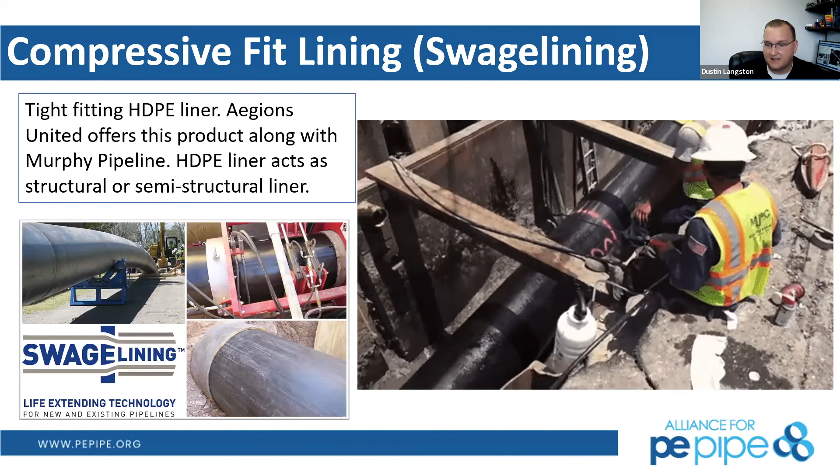And it's going through that same amount of strain to reduce down to the smaller diameter. Incredible amount of stress and ductility in polyethylene pipe.

Plow installations, they're on the left. We have a 24-inch diameter pipe going 6 feet down into the ground.

I don't want to break the illusion here, but it's not just that machine. You also have 2 plow winching machines up ahead to help pull it and create the plow path in the ground. It's not just this machine here with these little tiny tires able to plow 24-inch pipe into the ground. There are also 2 support vehicles out ahead of it, winching machines, to pull that pipe and that plow along.

But this is very, very common. You go anywhere now, you see a dozer hooked up with a plow, and they're putting conduit in the ground. This is very, very common now.

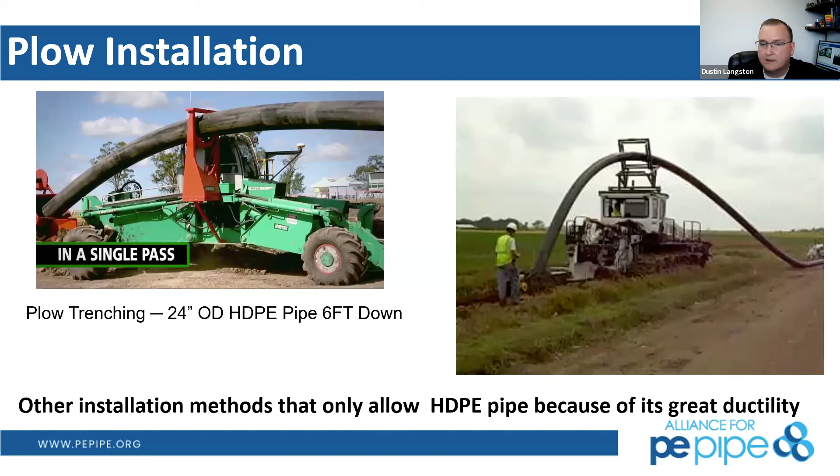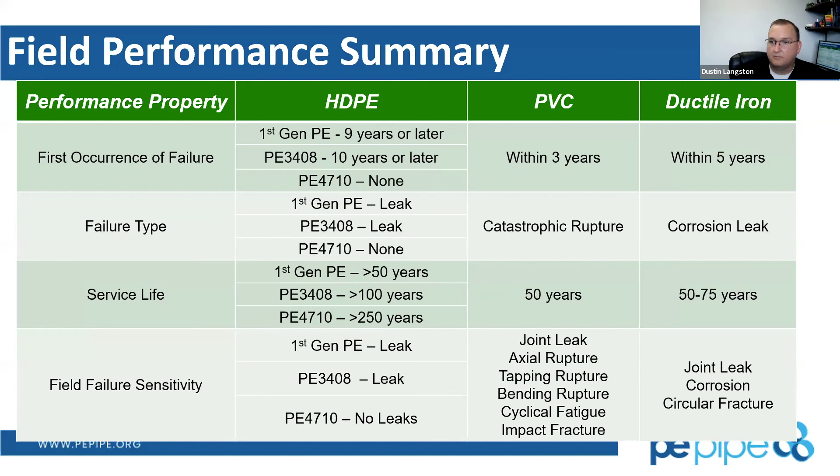Field performance. So even though we talked about this a little before, we did solve that original corrosion issue with plastics, but with PVC, we again introduced something new. We'll talk about polyethylene failures in the future as well.

I get these questions all the time, really putting the comparison out there: what is the comparison of ductile iron, PVC, and polyethylene pipe? So again, I like to go to the memes. I put this meme together myself. I'm like, okay, ductile iron, their claim to fame is strength.

We are the strongest pipe material out there. We have the highest tensile strength, highest elastic modulus, the highest everything. We're the strongest one out there.

There's a podcaster I listen to who has a friend who's a bodybuilder, and he calls him big for nothing because he doesn't have a job where he uses his strength. He doesn't have any hobbies that require this great amount of strength. He bodybuilds. He gets big and strong for the sake of being big and strong.

Moving on, who's next? What is PVC? If we're going to keep this weightlifting thing going, what is PVC? PVC is the guy that skips leg day. That is absolutely PVC. Hey, we have a higher tensile strength. We are the strongest technically plastic in the industry, which is absolutely true.

Tensile strength, 7,000 PSI. Instantaneous elastic modulus, 400,000 PSI. It's a very strong plastic material that is absolutely susceptible to fatigue failures. So great upper body strength, absolutely skipping leg day.

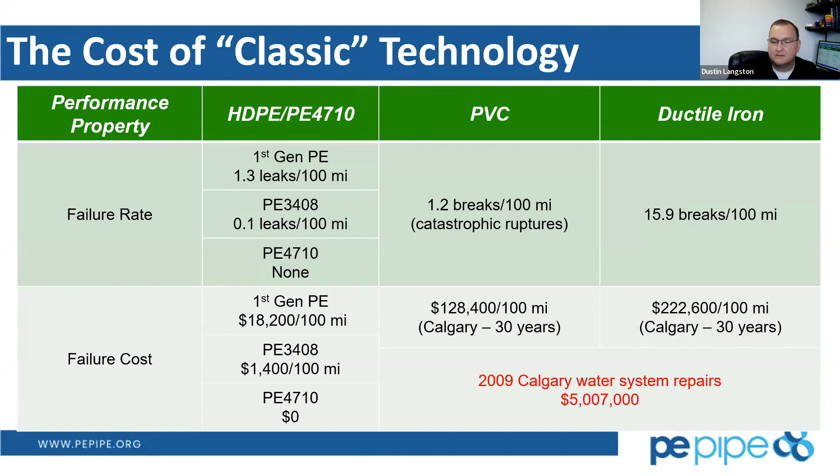And so the cost of classic technology, again, failure cost—this shows polyethylene pipe has very, very few failures. Not a lot of pipe in their system, though, at that time. More and more polyethylene is going into the ground in Calgary today.

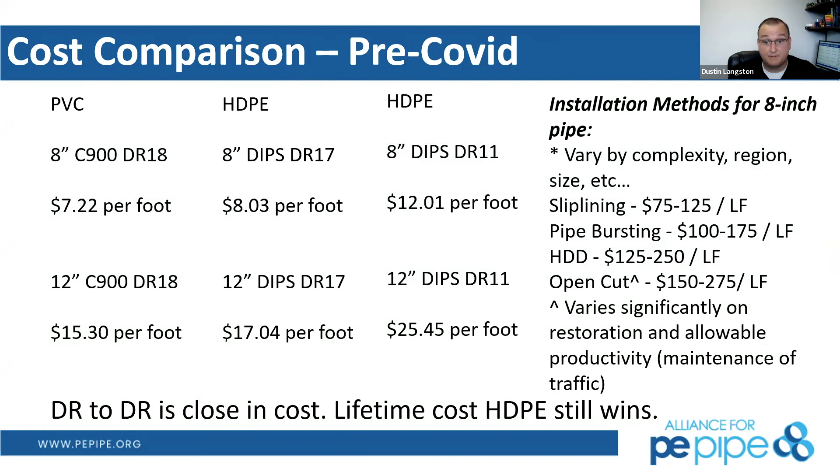So cost comparison, this is pre-COVID. I'm not even going to go over this anymore because it's completely out the window. Lead times and costs, that's the whole reason everybody's on this call today, just because they're all over the place. It depends on where you are in the country—they are literally all over the place.

So let's talk end of life scenarios. For polyethylene pipe, we very much understand what our end of life looks like. For ductile iron, it's corrosion. For us, it's pinhole leaks.

We talked about quick burst, overpressurization, the tearing apart of the crystal structure of a polyethylene pipe. The other failure method, which will be the ultimate failure method of polyethylene pipe, is what's called slow crack growth resistance. Slow crack growth is understood by using a test called the Pennsylvania Notch Test, called PENT.

For the original PE4710s over 10 years ago, it was required to have 500 hours of PENT slow crack growth resistance, which equates to 100 years of in-ground service life resisting slow crack growth. The materials we're using today, PE4710s, are well over 10,000 hours. So that's a 20 times multiplier on that 100-year service life minimum 500-hour PENT test.

So we understand the failure method of polyethylene pipe, we just don't know how long that is. We know for a fact it's well past 100 years, but the service life is really getting out there now. But what I want to really talk about, that nobody else is talking about - and I go to all the conferences, I go everywhere - no one is talking about this.

We are very familiar with how to fix broken pipe systems. Peter Dyke, with the Alliance, has put together a spreadsheet of most of the major municipalities in the country and their pipe system replacement, how often and how fast they're replacing their pipes. If every one of us out there - ductile iron, PVC, polyethylene - claim a 100-year design life, we need to be replacing an entire city's piping system every 100 years. And many of these cities, hundreds of them, are well over 400 or 500-year replacement cycles for these pipe systems.

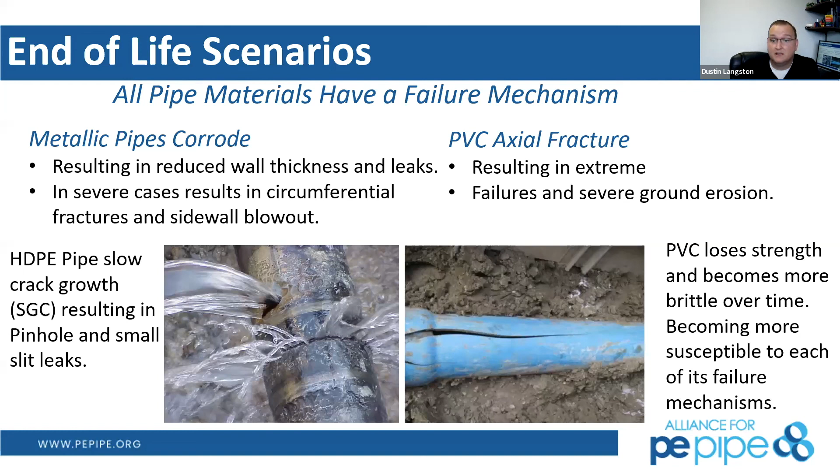Alan, yes, so we are right up at that time, and I think we've only got 1 or 2 slides left. Literally one. There you go.